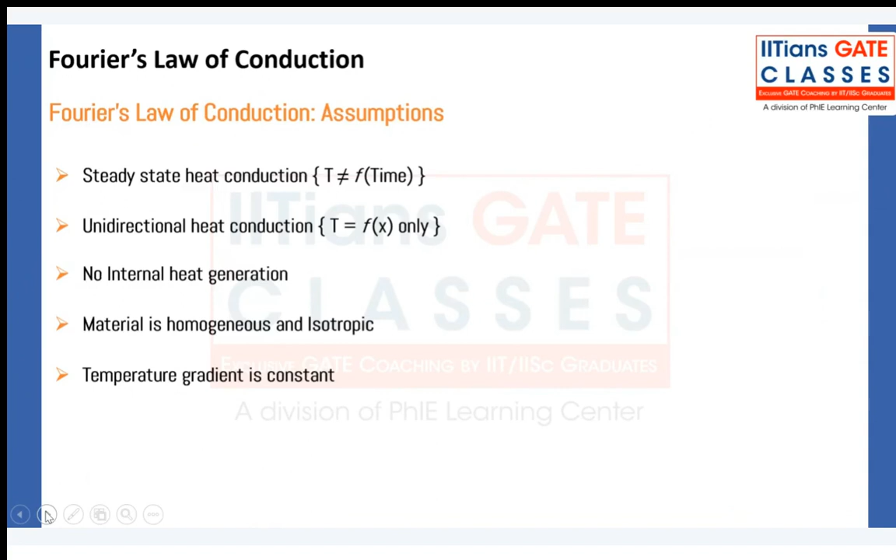Now, first of all, we are going to assume steady state heat conduction. What does steady state mean? The temperature is not a function of time.

But what happens when temperature is a function of time? That means the temperature of the body, inside the body or outside the body at the boundary, is changing with time. Whenever temperature is changing with time, it is called unsteady flow heat transfer. It actually means that rate of energy in is not equal to rate of energy out, so some energy will also be stored in the body. That will change the internal energy of the body, because any mass stores energy in the form of internal energy. So if energy in is not equal to energy out, the internal energy of the body will change. Chalo, theek hai.

Second assumption was unidirectional heat conduction. Why unidirectional? We said that heat transfer is only happening in the x direction. But for example, temperature is also changing in y and z direction, not only x direction. So that is called three-dimensional heat transfer. Now the temperature is not just changing in x direction, it is also changing in y and z direction.

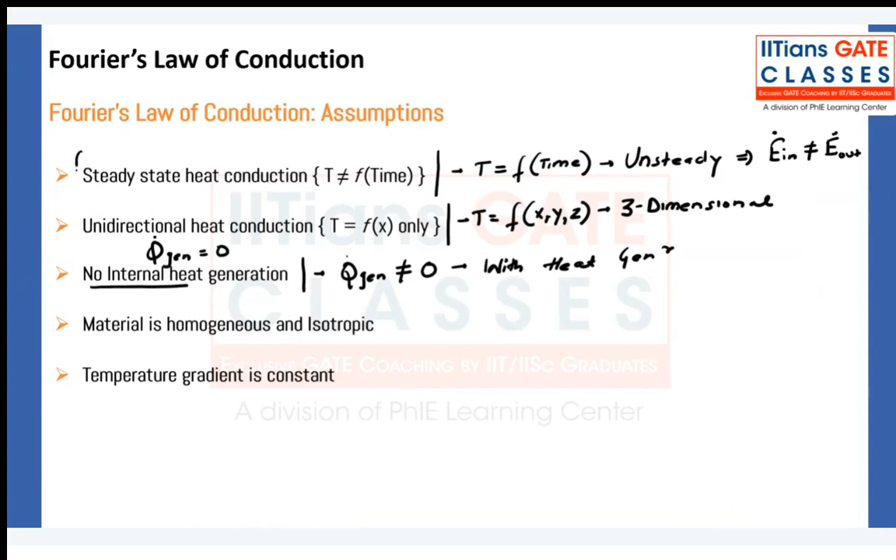Okay, there are other assumptions too, but these are three main ones. If temperature varies with time, that means unsteady state, or temperature varies in the y and z direction as well, or there is heat generation, then you cannot use Fourier's law of conduction. You can only use Fourier's law under these assumptions. If these assumptions are not valid, you cannot use it. That is why we have to come up with a generalized heat conduction equation.

Generalized heat conduction equation: Fourier's law was useful only for unidirectional cases, meaning temperature is a function of only x, y, or z direction. Steady state means temperature is not a function of time, and without internal heat generation. Only under these conditions was Fourier's law valid. But if these conditions change, we have to come up with a generalized heat conduction equation - we cannot use Fourier's law.

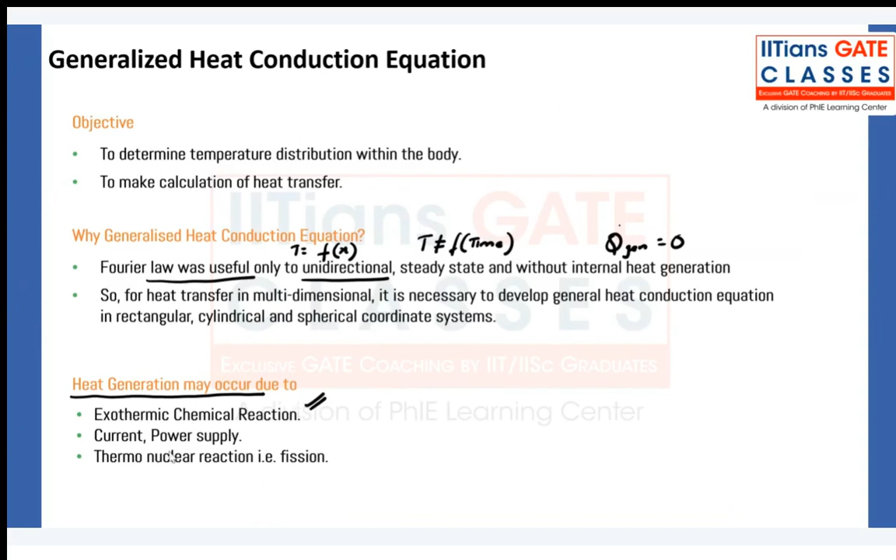So how does heat generation take place? Heat generation can take place inside the body if there is a chemical reaction, or for example if you are supplying current or power. If current is there, because of resistance in a conductor, heat generation can take place. Or nuclear rods, where fission reactions are happening inside the body - that is also an example, but a nuclear reaction happening inside the body in a nuclear rod can cause heat generation.

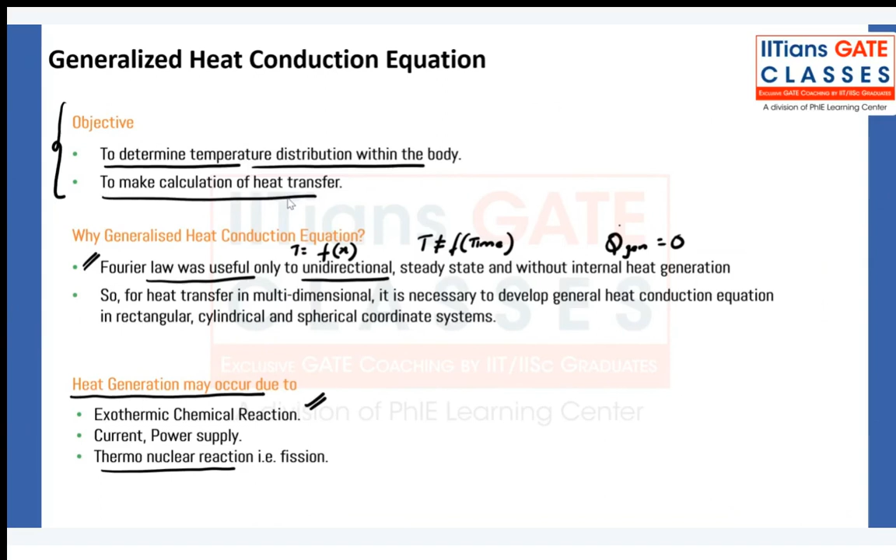So the whole objective of this study is first to define temperature distribution within the body. Earlier we assumed temperature is not changing with time, or it is only a function of x. Now if that is not the case, what is the temperature distribution - how is it changing with x, with y, with z, with time? We also need to make calculations for heat transfer - that is the objective of generalized heat conduction analysis. Okay, let's move on.

Now we will do this for all three cases: Cartesian coordinate, also called rectangular coordinate, then we will move on to cylindrical coordinate, then spherical coordinate. Let us start with Cartesian coordinate - Cartesian is basically in a plane slab.

Let us take a very small element inside the body, of thickness dx, with x increasing in this direction. Now in this small element of thickness dx, some heat is entering, q dot x, and some heat is coming out, and there is some heat generation as well.

All analysis in thermodynamics or heat transfer starts with energy balance, or energy conservation - energy is always conserved, it is a natural law. For the element of thickness dx, we need to do energy balance. What is energy balance? Whatever energy is coming in, plus whatever energy is generated inside this element, will be equal to the energy that is going out, plus the energy that is stored.

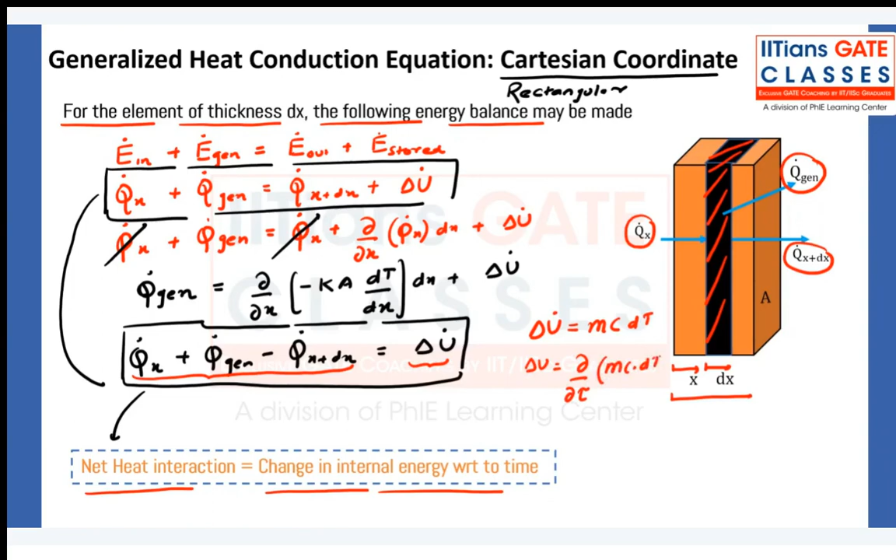Now we all know how do you write delta U. Change in internal energy. Can anyone tell me how do you write delta U? Yes, very nice. MC dt. Okay, now I am not talking about delta U, I am talking about delta U dot. So I can write del by del T of MC dt, or I can also write MC change in temperature with respect to change in time.

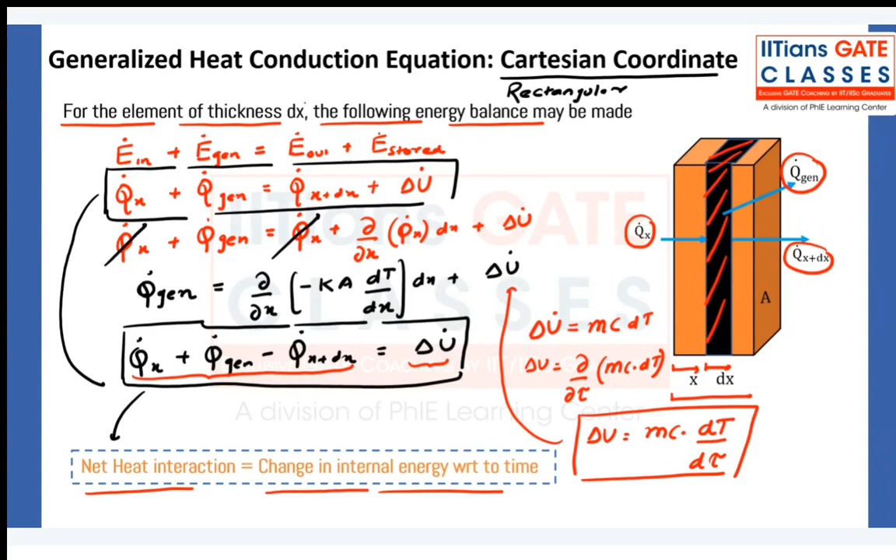So I have to substitute this here. I have to, not here. I mean, I can do it here as well, but our purpose is to put it here. Wait, we are going to consider in the other direction. Just wait, do not worry. We are only talking about x direction as of now. Now let us put it here.

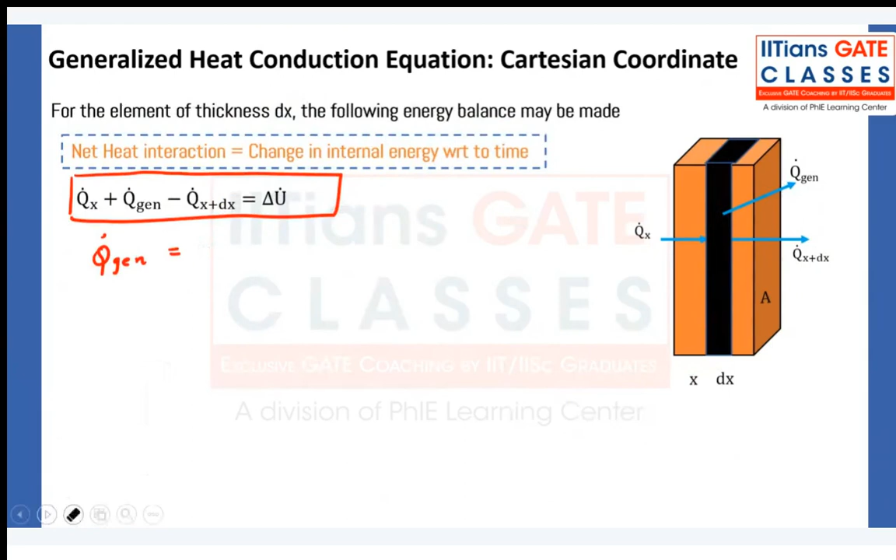So this is the equation, this is the main equation. And from this equation, we have gotten Q dot generation is equal to, minus del upon del x of Q dot x dx plus, what is u? mc dt by d tau. The unit of this is watts.

Let me simplify it further. Q dot generation is equals to, now let me write Q dot generation in terms of per unit volume. So I am writing Q dot generation into volume. The unit of this is watt per meter cube, and this is again meter cube, so you will get watts. And that is del by del x, how can I write this? It is conduction, ka dt by dx.

Now how can I write mass? Mass flow rate, mass is equals to density into volume, and volume is equals to A into dx. What is area? Area is this area, and thickness is this very small thickness. That is the volume, that is the dv. Okay, so let me write rho A dx del t by del tau.

Now this volume is also area into dx. This volume is also area into dx. So let me write the final equation. Area into dx is equals to del upon del x of minus ka dt by dx plus rho a dx dt by d tau. Now what can I do? Area, area, area, dx, dx, dx.

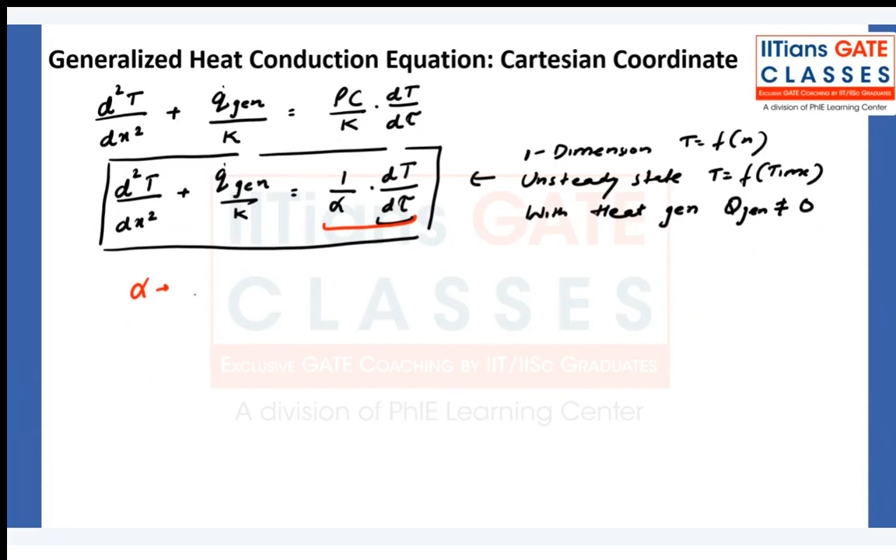Now what is alpha? Can anyone tell me what is alpha? Alpha is thermal diffusivity. K is thermal conductivity. So alpha is equals to K upon rho C.

K is thermal conductivity. Rho is density. C is specific heat. What about units? Watt per meter Kelvin. Density is kg per meter cube. Specific heat is joule per kg Kelvin.

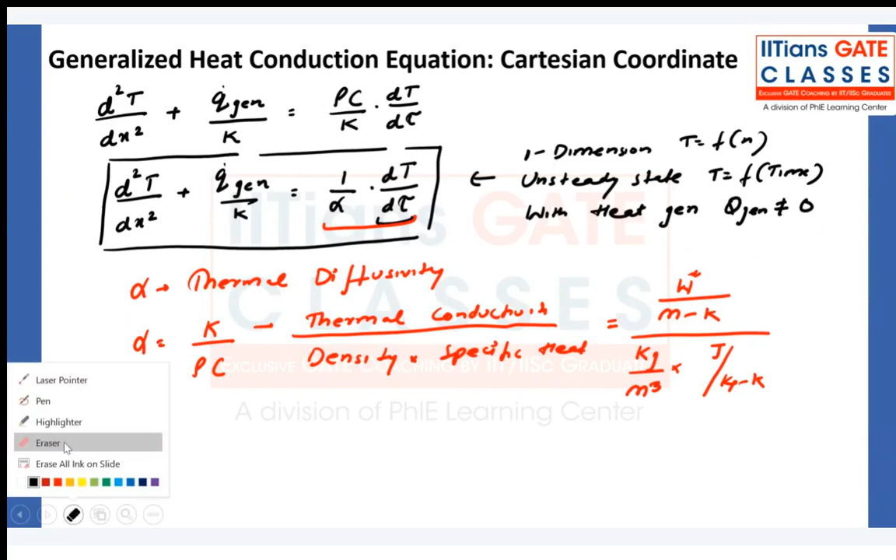Let me write this: watt into joule per second meter Kelvin. So what I have wrote is joule per second, then meter and Kelvin is already there. Kg meter cube into joule per kg Kelvin.

Now let us cancel the units. Joule and joule will get cancelled. Kg and kg will cancel. Kelvin and Kelvin will get cancelled. And this meter cube will cancel this, and you will get meter square per second.

So alpha is, we are going to talk about diffusivity. Do not worry, I am just telling you the mathematics behind it, just the formula right now. We are going to talk about the physical meaning of it later. Now this is only valid under certain conditions.

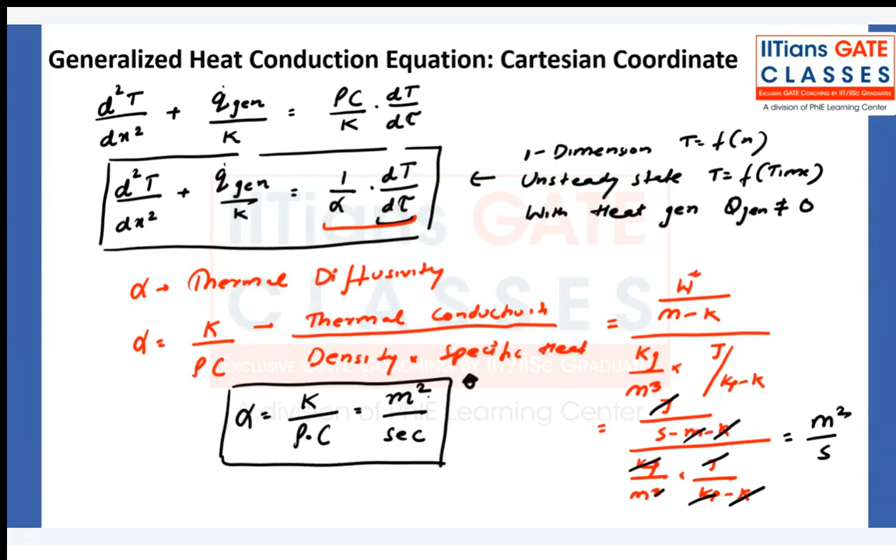But what about if temperature is changing in y and z direction as well? Let us say the generalized heat conduction equation for x direction is: d square T by dx square plus Q dot generation by k is equals to 1 upon alpha dT by d tau.

This is only for x direction, but it is generalized, because it is valid for unsteady state as well as for heat generation. So it is only for x direction. Now, the same thing that we have done, we will do for y and z direction.

Similarly, we will repeat the same process for y and z direction. So we will get this term for x direction, this term for y direction, and this term for z direction. And we will also get this and this term, but it will be common.

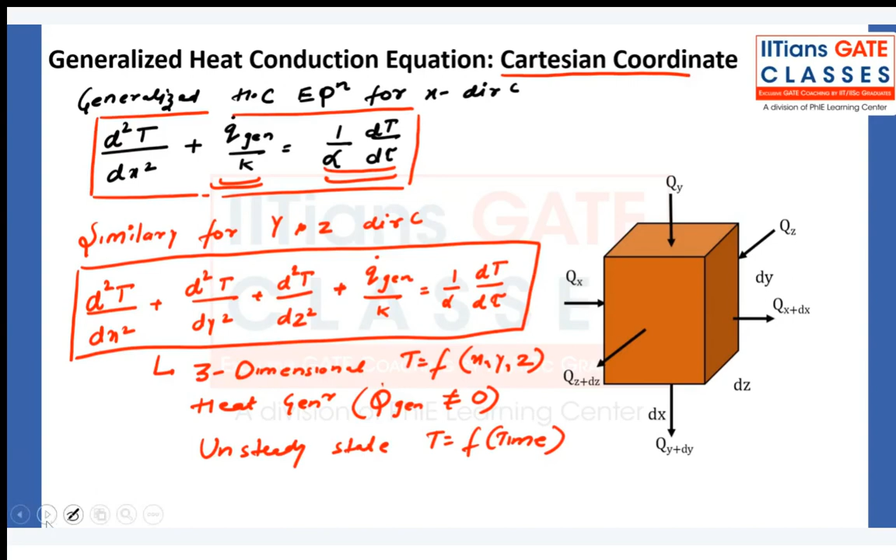Now, concept of thermal diffusivity. As I have said, it is K upon rho Cp, unit is meter square per second. K also tells you how much heat can be conducted from one side to another side. If you have one body here and you maintain a higher temperature T1 here, and here it is T environment.

As heat is transferred from one direction to another, when you start feeling that the surface is getting hotter, this is told by thermal diffusivity. How fast or how slow you will start feeling the temperature on the other end, it will be told by thermal diffusivity. Conductivity will tell you how much heat will be transferred from one side to another. Diffusivity will tell you at what speed the heat will go from one side to another. So it is a thermophysical property of material.

Thermal conductivity tells us how quickly the heat is diffused through the body. Both things are said by this diffusivity. I'll give you an example as well. The value of alpha talks about the ability of the material to allow the rate of heat transfer to get diffused through it. A larger value of alpha means either K is large or the heat capacity is small. Now let us take an example.

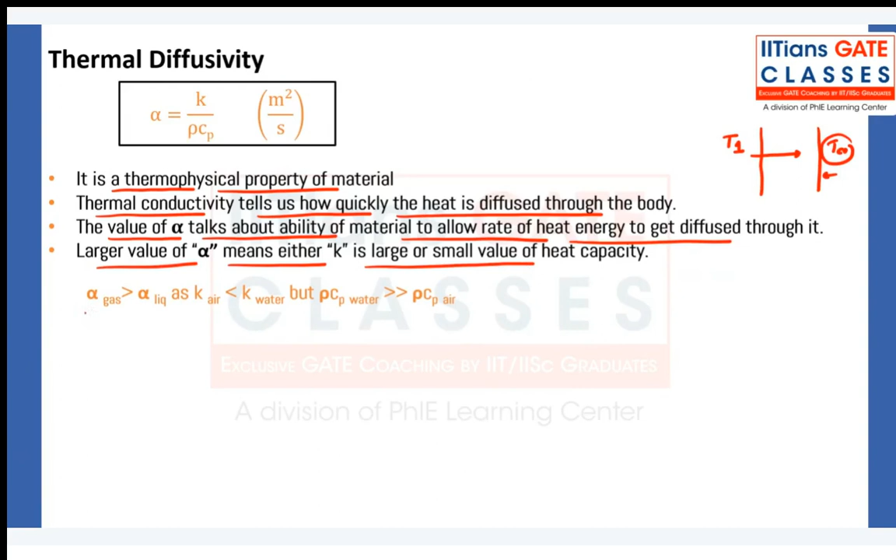You can see alpha of gas is greater than alpha of liquid. This you can read. Anyway, I'll take an example. Let's say you are drinking coffee in a glass cup or in a ceramic cup. Usually we drink in a ceramic cup at home, right?

Now tell me, I am telling you that the thermal conductivity of glass is less than the thermal conductivity of ceramic. Glass already has very low thermal conductivity. So if I am saying thermal conductivity of glass is low, that means what?

So you tell me, when you are holding a glass cup or a ceramic cup, in which cup do you take less time to start feeling hot or heat on the outer side? In which cup do you start feeling heat on the outer side more quickly? Glass or ceramic? Which cup is more comfortable to hold, where you do not feel much heat on the outer side? I want an answer from everyone.

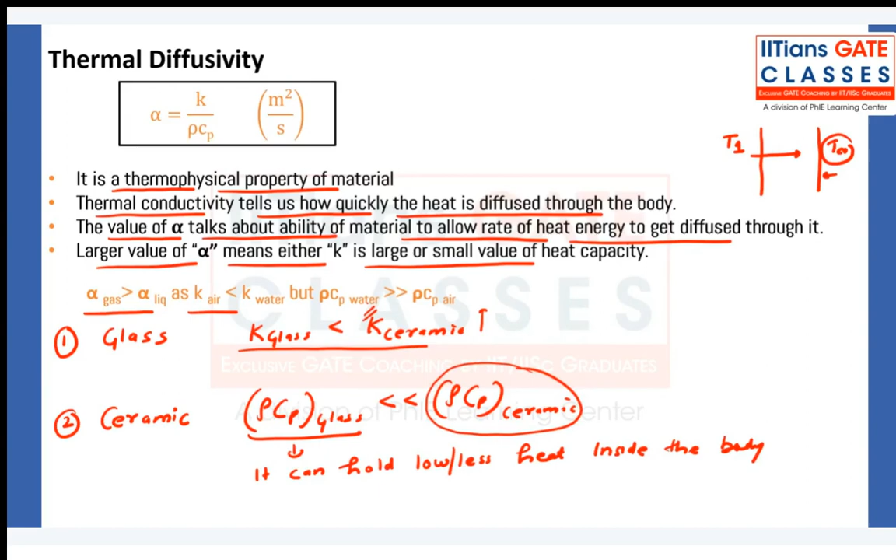It has higher heat capacity, so its conductivity is high. Yes, heat is coming in, but what is ceramic doing? It is absorbing the heat. It is not allowing it to go ahead.

So on the outer side, where you are holding the cup, heat has already diffused from inside. Heat has come inside, but ceramic is storing that heat. It is not allowing it to go to the other side. That is why you will feel the hotness much later in the ceramic cup.

Yes, that is true. The material that ceramic is made of can store more and more heat. Heat is conducted, it has come inside because of conductivity, but it is storing the heat, not allowing it to go to the other side. Because of this heat storage, thermal diffusivity of glass is more - it is diffusing more heat. So even though conductivity is less for glass, you will feel the hotness on the other end much quicker than ceramic.

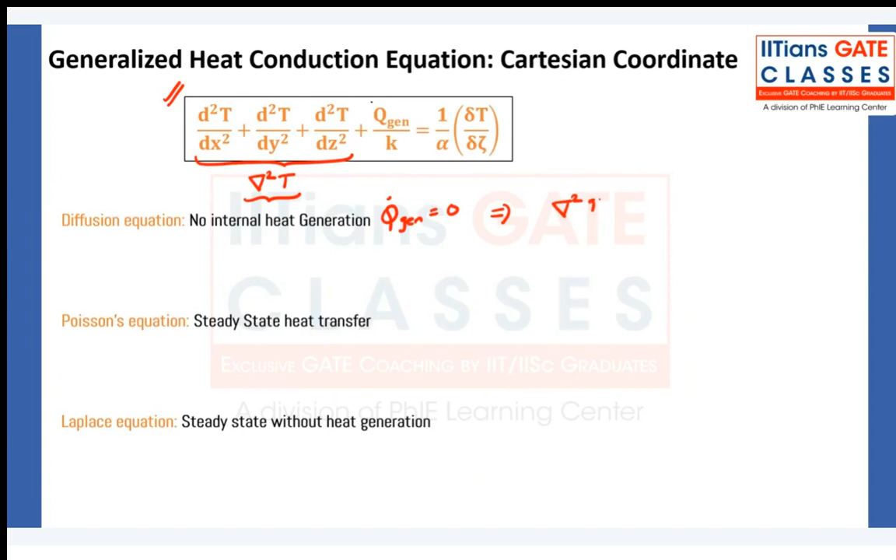So this was our general equation. Now let us make an assumption and go ahead with that. First, let us assume there is no internal heat generation, meaning q dot generation will be equal to 0. So how can I write the above equation? I can write this, I hope you already know this.

This is called the diffusion equation. It is called the diffusion equation.

Then steady state - steady state means what? The temperature is not changing with time, so delta T by delta tau equals 0. So how can I write this now? I can write del square T plus q dot generation by k is equals to 0.

This is called Poisson's equation. And finally, if steady state is also there, meaning del T by del tau equals 0, and without heat generation meaning q dot generation equals 0, then it is called the Laplace equation. Yes, very nice, Sahil.

You will directly get these equations. I'll wait for 1 minute.

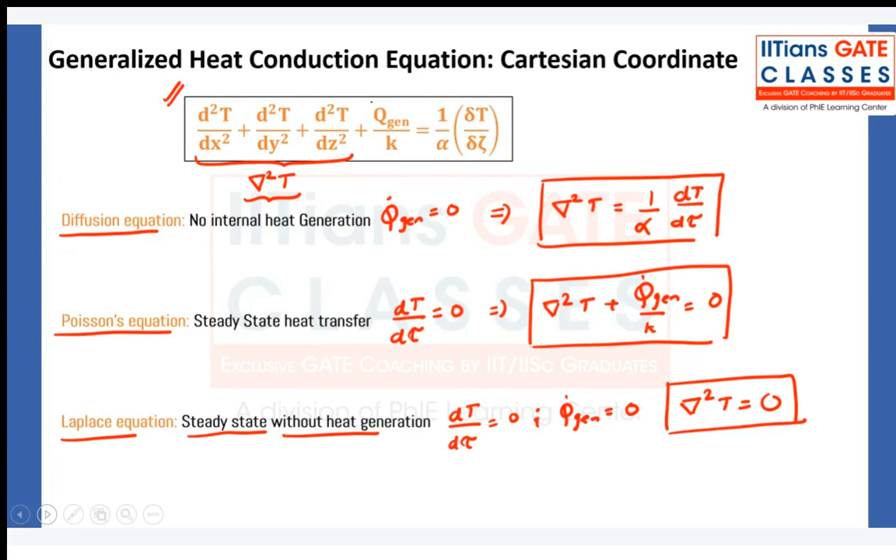So we are talking about steady state, one dimensional heat conduction in Cartesian coordinates without heat generation. It is steady state, one dimensional, and without heat generation. For example, heat transfer through your windows is an example of this type of heat transfer. Inside the window, there is no heat generation, right? And it is happening in only one direction, because this x direction is only significant compared to the thickness of the glass.

The y and z directions are much bigger, so whatever heat transfer is happening there is insignificant. So we assume that heat transfer is only happening in one dimension - whatever you want to call it, x or z, it is a function of only one dimension. And it is steady state because there is no heat generation, and it is not changing with respect to time as well. So this is the case of steady state, one dimensional, in Cartesian coordinates, without heat generation.

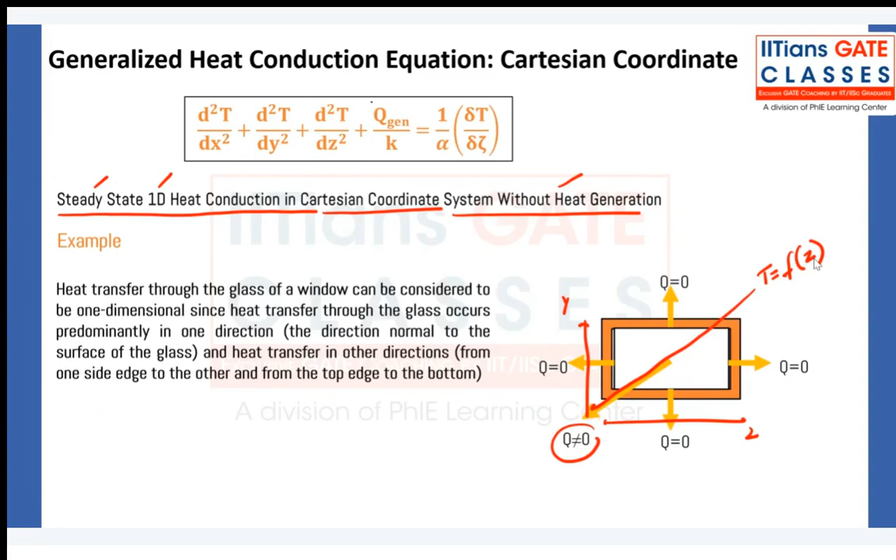So let us take this example, let us take this case, now we will be specific with our case. Okay, steady state - what do I call steady state? First, steady state means the change of temperature with respect to time equals zero. Second, one dimensional means d-square T by dy-square equals d-square T by dz-square equals zero. It is not compulsory that you take d-square T by dy-square - any two would be zero. I am taking that only x is happening.

Any two could be zero, but it is only happening in one direction - it could be x, y, or z. Third, no heat generation, so heat generation is equals to zero. If I apply all these assumptions in the above equation, this is zero, this is zero, this is zero, this is zero. So what do I get? D square t by dx square is equals to zero.

Now this is my equation. It is only valid for what case? Under these assumptions, under these assumptions, under these assumptions. Is it clear?

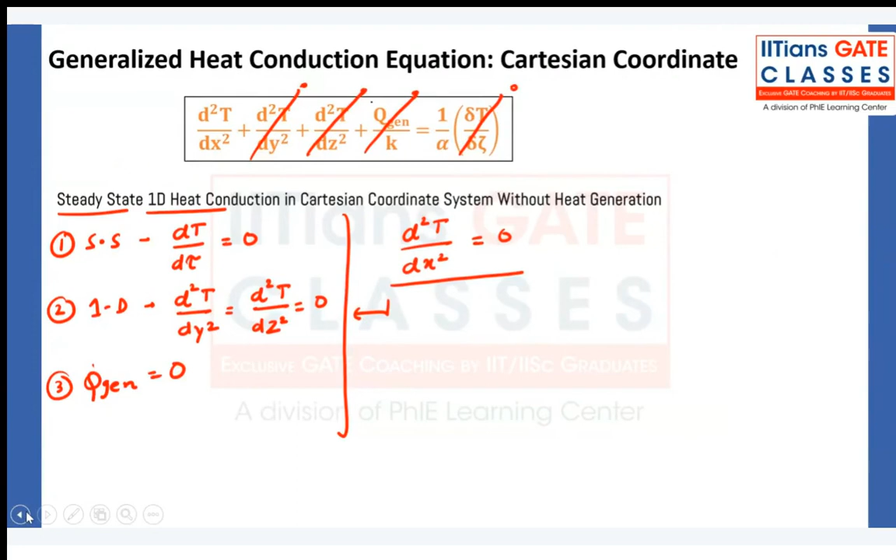So this is my equation, this is my temperature distribution equation. This is my rectangular slab, isn't it? Now what is the boundary condition? X is changing in this direction, and I am assuming at x is equals to 0, t is equals to t1. At x is equals to L, t is equals to t2. And there is no heat generation.

Let me integrate this. If I integrate the first time, I'll get dt by dx is equals to c1. If I integrate this again one more time, I'll get c1 x plus c2. So this is how my temperature is changing with respect to x. I can anyway tell you that this is a linear equation, y is equals to ax plus b. This is a linear equation.

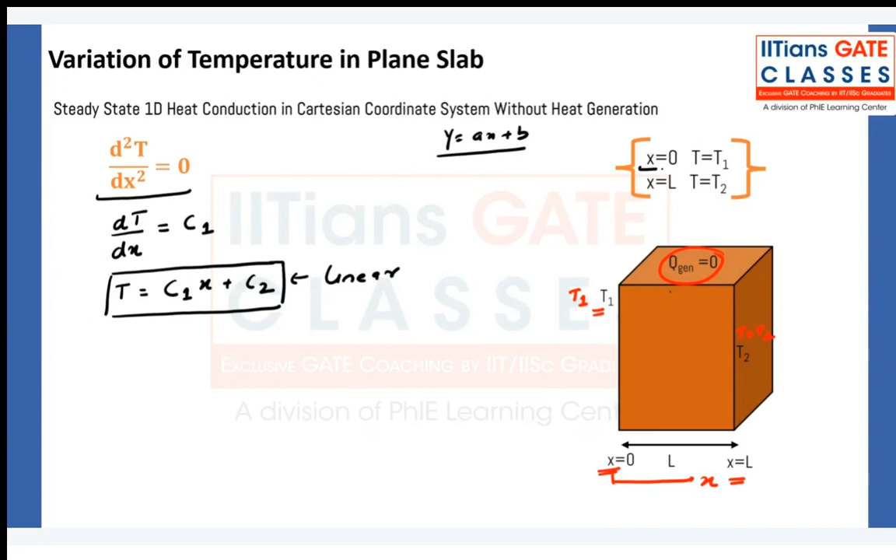But anyway, let us apply the boundary conditions. Let us apply the first boundary condition first: at x is equals to 0, t is equals to t1. So t1 is equals to c1 times 0 plus c2. What do I get from here? c2 is equals to t1.

Let me apply the second boundary condition: when x is equals to L, t is equals to t2. So this will be t2 equals c1 L plus c2, and c2 I already know. Let me write c2 here as t1. So I have replaced c2 by t1. So t2 minus t1 by L is equals to c1. So I got c1, I got c2.

Let me put this here. So what do I get? T is equals to c1, which is t2 minus t1 by L, times x plus t1. Now this equation is also telling me that it is a linear equation.

So in a rectangular slab, in a plane slab, temperature variation is linear, when all these conditions are satisfied: steady state, one dimensional, without heat generation. In this case, temperature variation is linear with respect to x in plane slab.

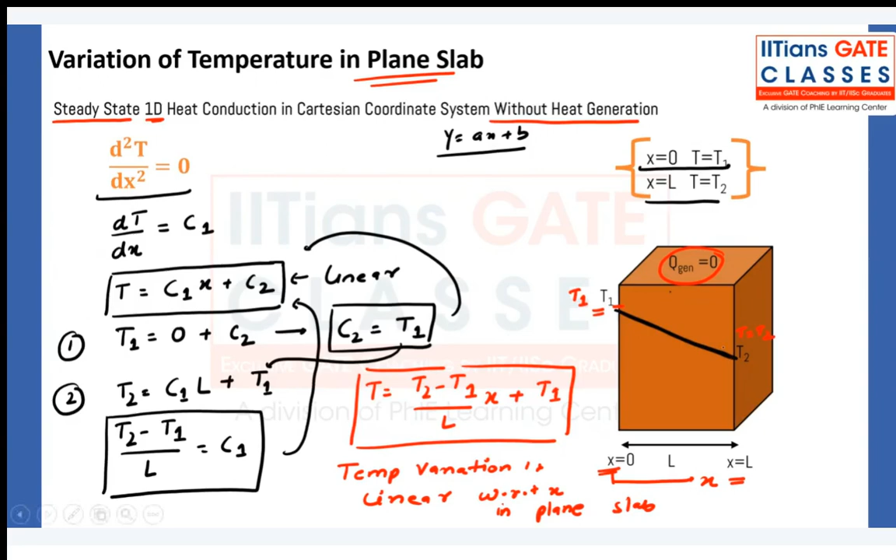So how do I draw this? Anyway we were drawing it like this, but now I know that it is varying linearly, like this only. So this is my temperature variation in this case, linear for plane slab when steady, one dimensional, and no heat generation - only then it is valid for plane slab. So it is linear.

The temperature distribution is not a function of k, so it is independent of material because k is a material property. So whatever the material is, temperature is going to linearly vary with x.

Now we have come to steady state, one dimensional in Cartesian coordinate, but with heat generation. There is a heat generation. Heat generation is not zero, heat generation is not equal to zero. Let us write this.

So when I say steady state, that means dt by d tau is equals to zero. One dimensional, when I am saying it is d square t upon dy square is equals to d square t by dz square is equals to zero. So what am I left with? These two are zero, so I am left with d square t by dx square plus q dot generation by k is equals to zero. I am going a little faster because these are derivations only, it is simple mathematics.

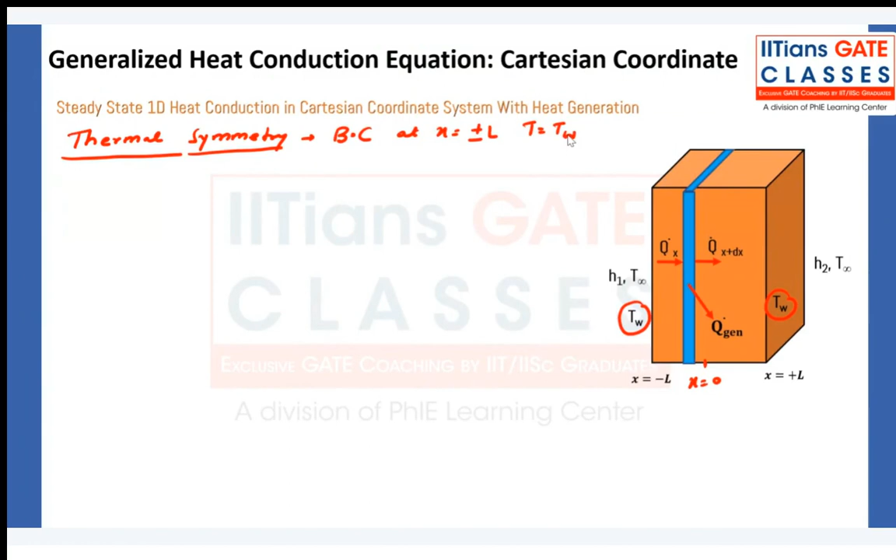Now do not assume that this is the only case. There is a case of thermal unsymmetry as well, where the temperature could be different. Then you need to derive it again, but we are deriving for thermal symmetry. You need to know the steps. But if another case comes, then you need to derive it yourself. But for GATE exam, it will be a very small derivation.

Now temperature, I defined the temperature distribution equation. This equation is: minus q dot generation by 2k x square plus c1x plus c2. Now let me apply the first boundary condition. What is the first boundary condition? X is equals to minus L, T is equals to TW.

So what will I get? I will get TW is equals to minus q dot generation by 2k times minus L square plus C1 times minus L plus C2. So can I write it as minus q dot generation by 2k L square, because it is minus L square, so minus square means plus, minus C1L plus C2.

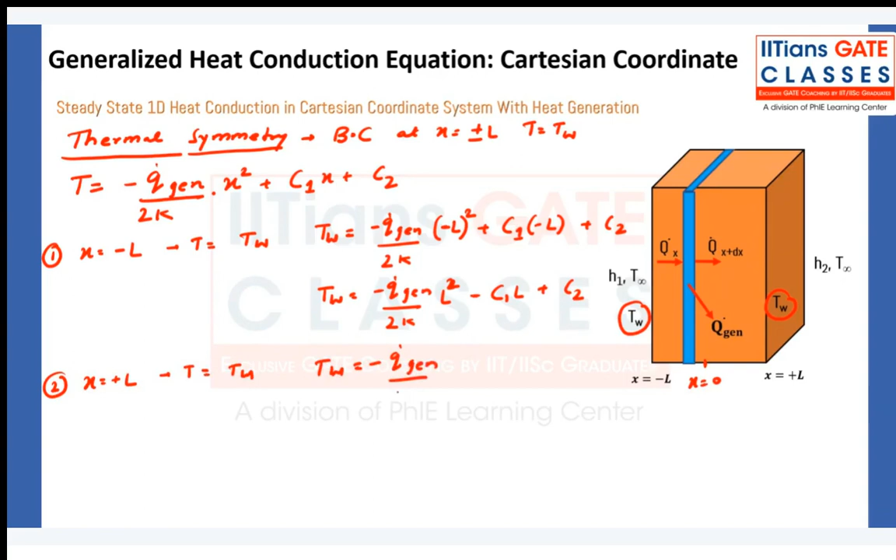Second boundary condition. What is the second boundary condition? X is equals to plus L, T is equals to TW. Let me apply this. TW is equals to minus Q dot generation by 2K L square plus C1L plus C2. Okay, what can I do now? Let me add them. So 2TW is equals to 2 minus... one second.

2TW minus 2Q dot generation upon 2KL square. This will get cancelled. It is minus C1L plus C1L to, and this is 2C2. So from here I can get C2 equals TW, because this 2 will also get cancelled. TW plus Q dot generation by 2KL square. This is my C2.

Now let me put C2 here. So when I put C2 here, what will I get? Let me write this on the next page, I can't write it here.

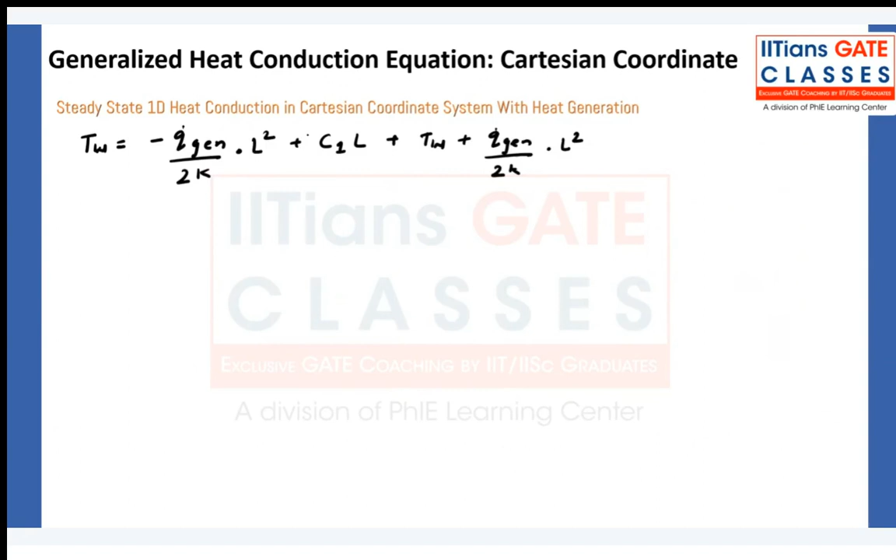TW is equals to minus Q dot generation by 2KL square plus C1L plus TW plus Q dot generation by 2KL square. Yes, very nice. So TW and TW get cancelled, same sign. This is opposite sign, this will get cancelled, and you will get C1L equals 0.

That means C1 is equals to 0. Now I got the value of C2, that is this. C1 is 0, that is what I wanted. Now I can substitute in this equation.

What will I get? This is the general equation now. T is equals to minus Q dot generation 2KX square plus TW plus Q dot generation. You know C1 is 0, so C1 I can remove. Generation by KL square by 2. This is my general equation, this is my temperature general equation.

Okay, now I need to find out. You see, this is by 1 second, this is my body. Now what I am saying here, it is TW, here also it is TW, and there is heat generation inside the body. Now that means there is a location, there could be an X. If T is decreasing in this direction, increasing in this direction, so there will be a location at which T will be maximum. I need to find out that location. How will I find out that?

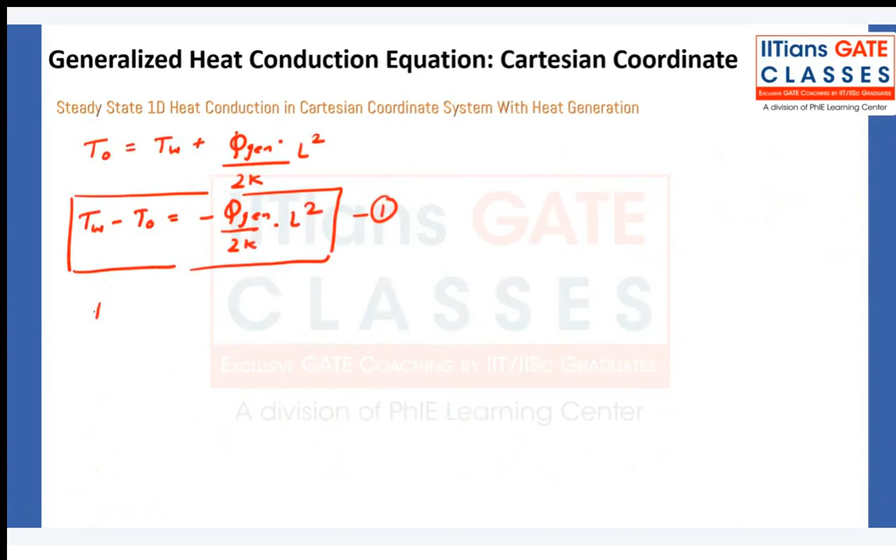This equation, okay, I can take, let me rewrite this equation. There's so many equations. T is equals to minus Q dot generation by 2KL, what is this? X square plus TW and plus Q dot generation 2K upon 2K into L square.

Okay, so can I write T minus TW is equals to Q dot generation by 2K, L square minus X square. Is it clear? Is it clear till now?

Okay chalo, so now what is TW? TW is, you can take it out, TW from here. Okay, so let me write it. TW is equals to T naught plus, it is minus T naught plus Q dot generation by 2KL square. Okay, from here I have taken out TW and this is already there. Just 1 second.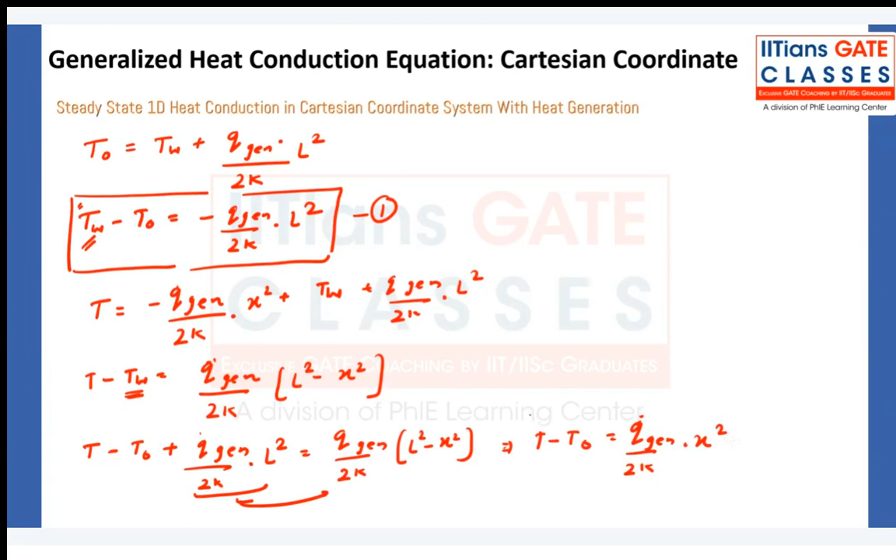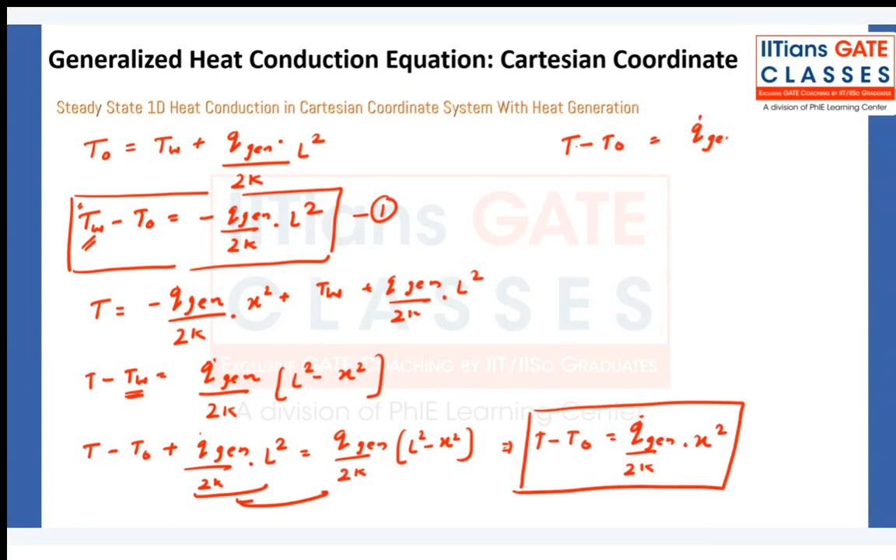So it is T minus T naught equals Q dot generation by 2K X square, upon TW minus T naught equals Q dot generation by 2K L square. So this and this will get cancelled. You will get X by L, the whole square.

Now this is your temperature distribution in the case of heat generation. In the case of heat, which negative sign? Which negative sign?

This will come on the other side. No, TW, here we have minus. So it will become positive, right? Are you telling about this sign?

No sir, like we are taking Q generation to the other side, right? So when we minus the x... Okay wait, tell me. Hello? Hello sir, hello, tell me. Like when we take Q gen L square by 2k to the other side, there we will cancel out the L square and minus x square will be left out, right? Yes.

So okay, there is a minus Q sign here. Yes. Okay, so here we already have some minus and it will get cancelled. Is it okay?

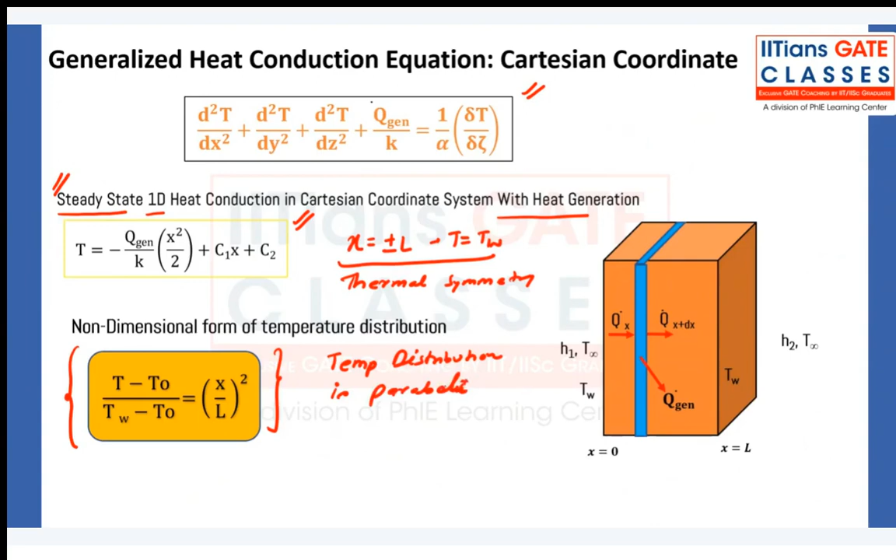Now, so what happens if there is not thermal symmetry? Okay, this is non-symmetry. On this side we have T1, on this side we have T2. What will you do? Look, your temperature distribution equation will remain the same.

Now you will put these boundary conditions in this and find out C1 and C2. Once you have found out C1 and C2, you can put that back here, and then you will get a temperature distribution equation as a function of x. That way you will know how the temperature is varying in this particular case.

And then what you can do? You can do dT by dx, and put that equal to 0 to find out x max, at what location you are getting the maximum temperature. So these T1 and T2 will be given to you in the question, and you can put this and solve. Okay, is it clear?

Is it clear to everyone? Shruti, any doubt?

Okay, I am very happy to skip derivations, I have no problem. If I just give you the results directly for spherical, I can do that. But at the initial level, it's a good idea to know how we are proceeding, because if in the exam they slightly move out of the conditions, since everything we are doing involves applying boundary conditions and assumptions, if you know the process, you can apply them. Chalo, let us move on.

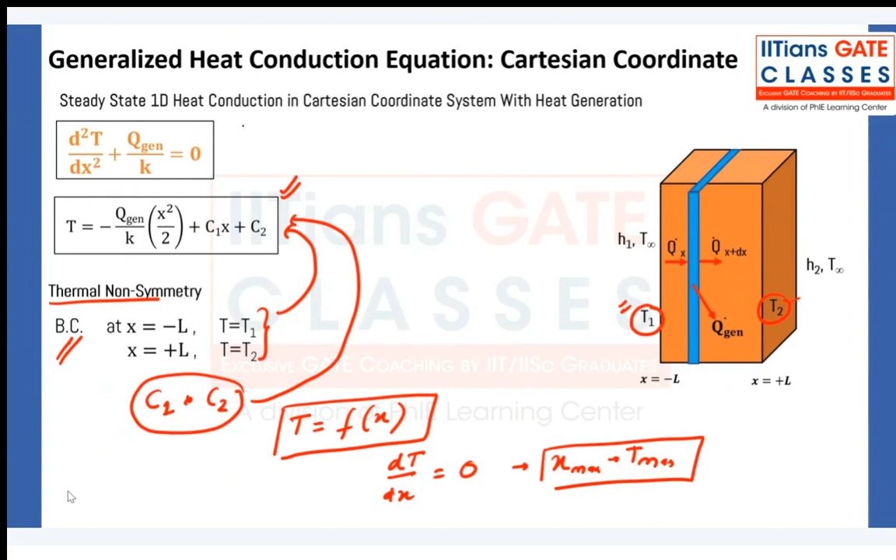Now we have come to cylindrical coordinates. What we are going to do is apply the same energy conservation we have applied before. First we are only talking about thickness dr, then we are going to extend this later on.

This is the same equation which we have taken for energy balance. Now if I extend this: q dot x plus q dot generation minus q dot x minus del upon del x of q dot x dx is equals to mc dt by d tau.

Now this I can conveniently cancel. How can I write this in the form of watt per meter cube instead of watts? I'll have to multiply it by volume. Volume is area into dr, small dr.

Just a second, I've made a slight mistake here because I took the general equation of Cartesian coordinate. It's my mistake, chalo.

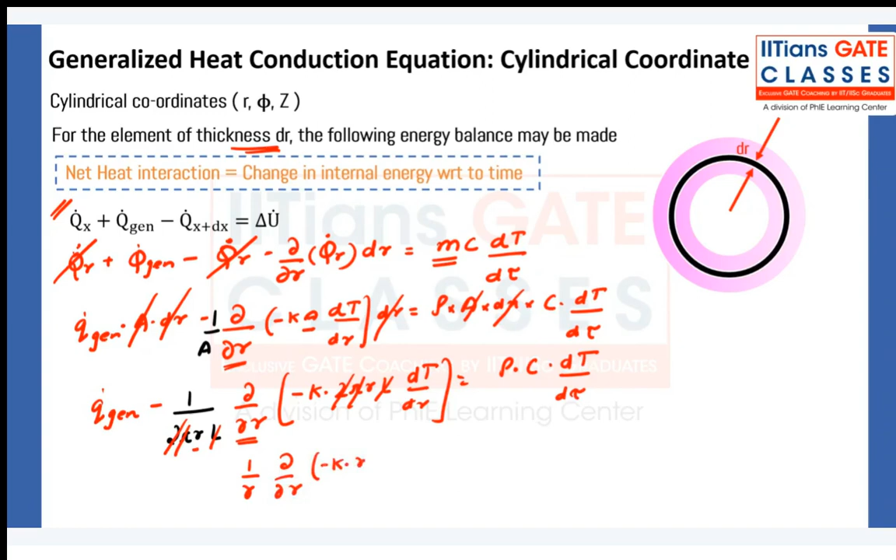So what we get here: I can write 1 by r, del upon del r, minus minus becomes plus, so this: 1 by r del upon del r of minus k dt by dr plus q generation is equals to rho c dt by d tau.

Clear? Is it clear till now?

Now what can I do? Let me divide everything by k. If I divide everything by k, conductivity being constant goes out, and this term also gets divided by k. So eventually we get: 1 by r del upon del r of minus r dt by dr plus q dot generation by k is equals to 1 upon alpha dt by dt. I don't think I need to tell you about alpha, it's k upon cp, rho c, that is k upon rho c.

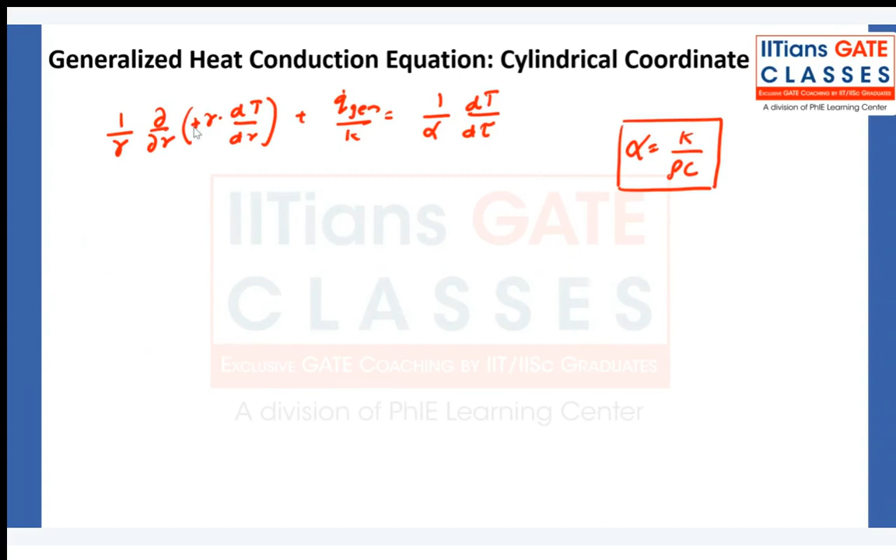Yes, very nice, sorry my mistake, okay so this is done. Now this is my generalized equation for cylindrical coordinate, which means it is one dimensional: temperature is a function of r, it's unsteady state meaning temperature is a function of time, and heat generation is happening, meaning q dot generation is not equal to zero. Then only, and it is for cylindrical coordinate, you can use this equation. This is the general equation, chalo.

Now what will happen if I am not talking about just the r direction? So I am going to consider r, theta and z. There is a whole derivation for it which is really of no use for us, seriously. So for the r direction, what we have defined is 1 upon r del upon del r of dt by dr.

You have to write this equation so many times that you yourself remember it. You don't have to see it again and again, although I sometimes need to see it again, but because I am not preparing for it, you are. So I can have the leverage of going back and seeing it, but you don't have that freedom. Okay, I have done my part. Chalo, theek hai, this is for the r direction.

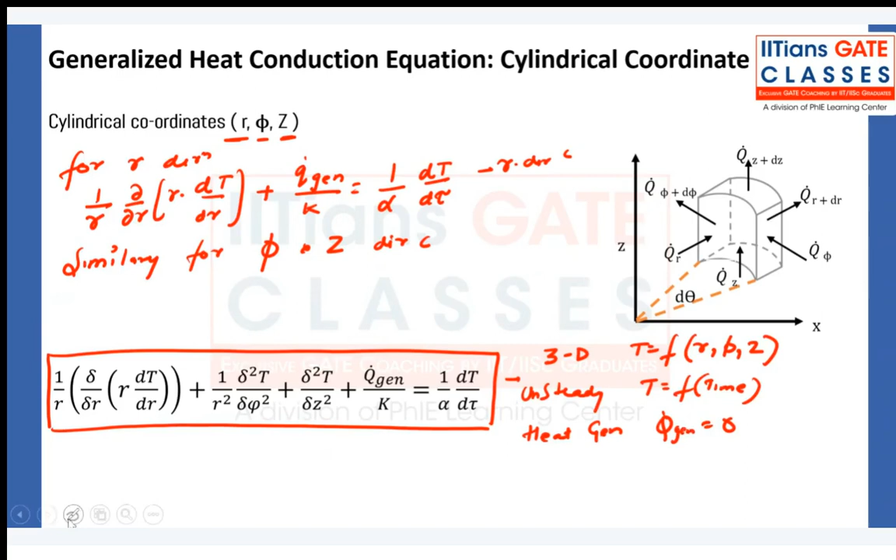Chalo, now we need to do the same thing, we can't do anything else. So this is my general equation. Now I'll take the most simplest case: steady state, one dimensional, and without heat generation.

Without heat generation means this term is 0. Steady state means this term is 0. And one dimensional means these two terms are also 0. So I can write: 1 upon r, del upon del r, of r dt by dr, is equals to 0. This is my equation under these conditions: steady state, one dimensional, and without heat generation. So I can write it as del upon del r of r dt by dr is equals to 0, because r moves to that side and the equation equals 0.

Now let me integrate it. Integrating the first time, what will you get? r dt by dr is equals to C1. Very simple. Integrate it one more time. We will integrate again, but let me simplify it first: dt by dr is equals to C1 by R. Now if I integrate it, I get T is equals to C1 ln R plus C2.

So what do I know? In the plane slab, under these conditions, the temperature distribution was linear. But under these conditions, for a cylindrical coordinate, the temperature distribution is logarithmic. Okay, chalo, but I can't leave it here, I need to simplify it a little further. I have already derived that the temperature distribution is C1 ln R plus C2.

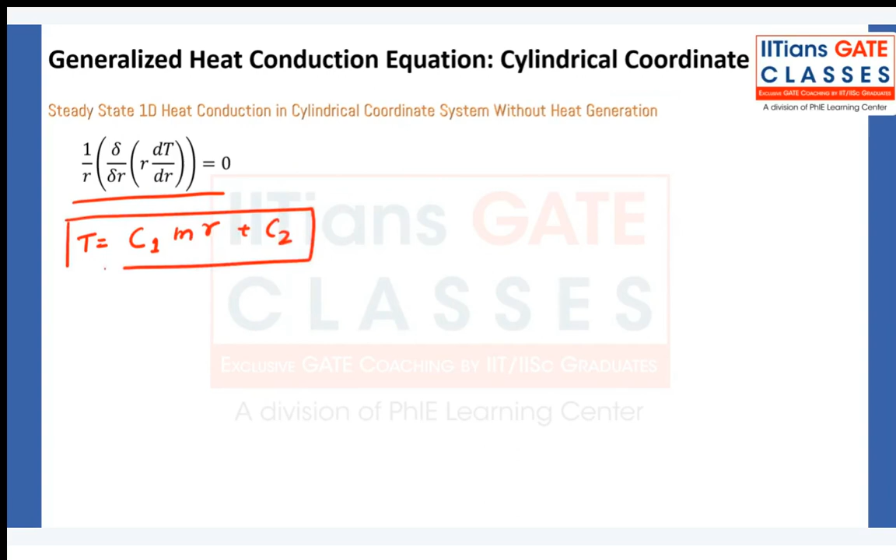Now I have to apply the boundary conditions. What are the boundary conditions? If this is the cylinder, at the inner surface, temperature is T1. At the outer surface, where R is equals to R2, temperature is T2. So it looks like this: at R is equals to R1, temperature is T1; at R is equals to R2, temperature is equals to T2. So these are my boundary conditions.

It's very simple, you can do it yourself as well, because I am not doing it right now. I don't know if I left the space for it, but it's very simple, it's not a very big issue. For GATE also it is not required, but it is a simple step. What is the simple step? Look, you apply these boundary conditions and calculate.

Apply boundary conditions and calculate C1 and C2. Okay, C1 and C2 we have calculated.

Then substitute C1 and C2 in the temperature distribution equation. Which equation? Again, this is the temperature distribution equation. Okay, so once you do that, you simplify that and you will find out this equation.

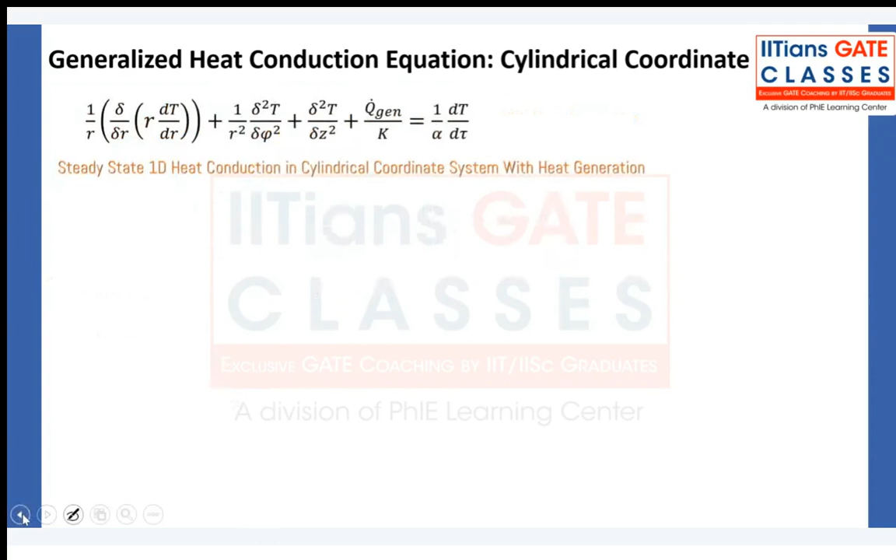Now, in order to maintain steady state, whatever heat is generated inside the body, you have to convect it outside. If this is your cylinder, whatever is generated here at the center, it needs to be convected out by using some fluid.

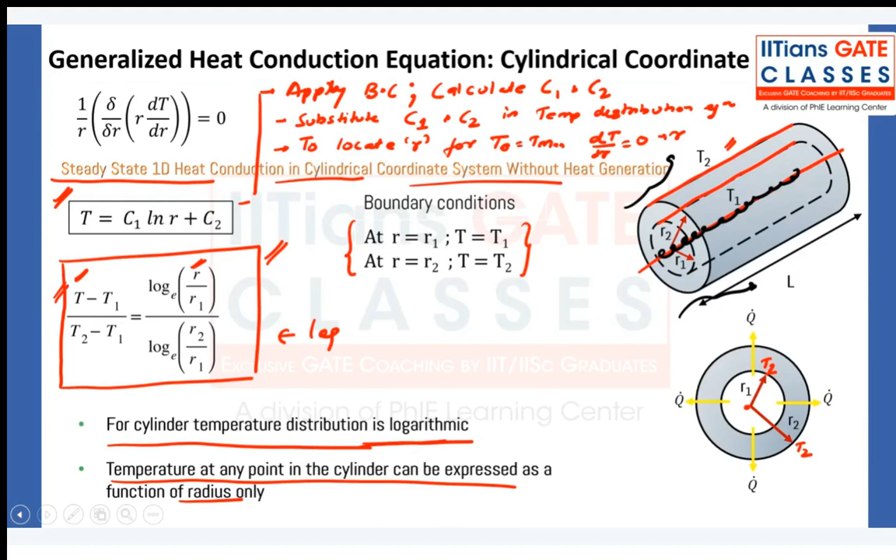Only then you will be able to maintain constant temperature on the boundaries. That is the main criteria for nuclear rods. You have to maintain whatever chemical reactions are happening inside, whatever heat is getting generated, but you need to maintain a constant temperature outside the nuclear rods, because you cannot let the temperature of nuclear reaction and nuclear rod increase. Otherwise, there will be uncontrolled reaction. So you cannot allow that.

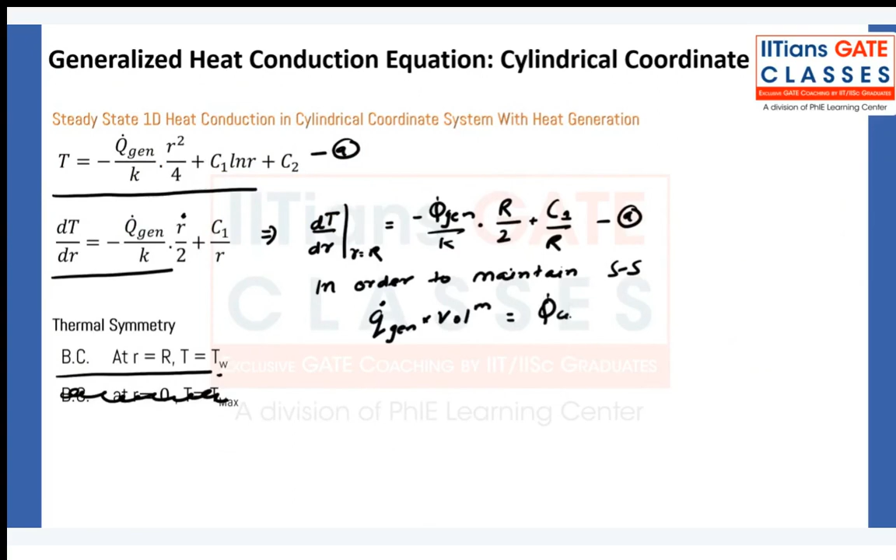So in order to maintain a steady state, whatever heat is generated, Q dot generated into volume is equals to Q convected. Whatever heat is generated, you need to take it away by using convection. So what can I write? Q dot generated into volume, pi r square L, is equals to, first of all it is conducted. So it is conducted out of the nuclear rod. You see here, first of all it will be conducted out and then it will be convected out.

So it is also equal to conduction, and then it will be equal to convection. Okay, now it is minus Ka dt by dr at R is equals to capital R. Only here it will be equal to Q convected. Where is Q convective happening? At the surface, at R is equals to capital R, here.

Is it clear till now or not? Any confusion here? Convection is happening at outer radius, at R is equals to capital R. Is it clear? Any doubt till now? Then we'll move ahead.

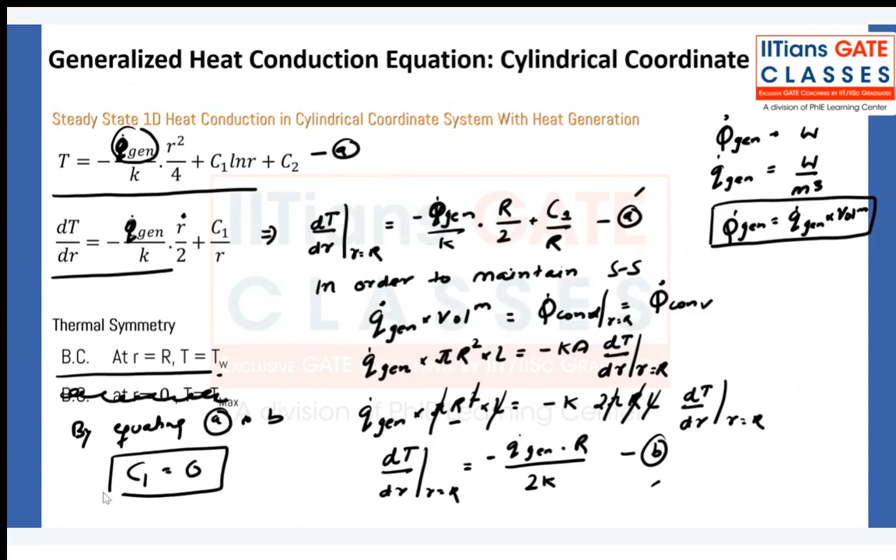Okay, now what can I do? I need to find out the location of maximum temperature.

So I need to find R that will give me maximum temperature. How do I find out? I have this equation, dt by dr. So dt by dr is equal to minus q dot generation by 2k r, plus c1 by r.

And I know that c1, I have just now found out, is 0. So we need to put it equal to 0. What does that give me? What is the location of maximum temperature? So minus q dot generation into r by 2k is equal to 0. That means r is equal to 0. It is the location of

T max or T naught. So now what do I do? Let me put this here. So this is my equation. T is equal to minus q dot generation by 4k r square, plus c1 ln r, plus c2.

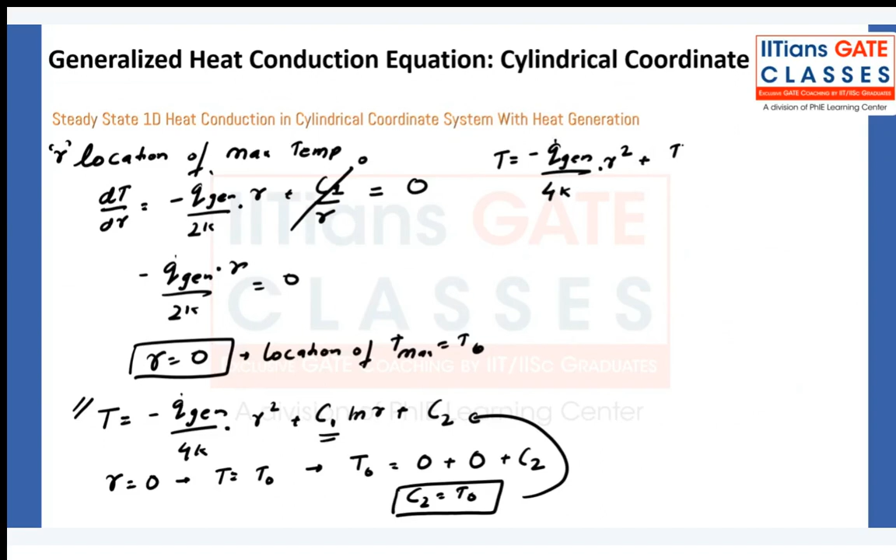So what is the main equation now? T is equal to minus q dot generation by 4k r square. Now c1 is 0, so I will not write c1, plus T naught. So can I write T minus T naught is equal to minus q dot generation by 4k r square? Yes, I can write this.

And I also know that at r is equal to capital R, T is equal to Tw. I can also put that in the same equation. So I get Tw minus T naught is equal to minus q dot generation by 4k, into capital R square. So this gives two equations.

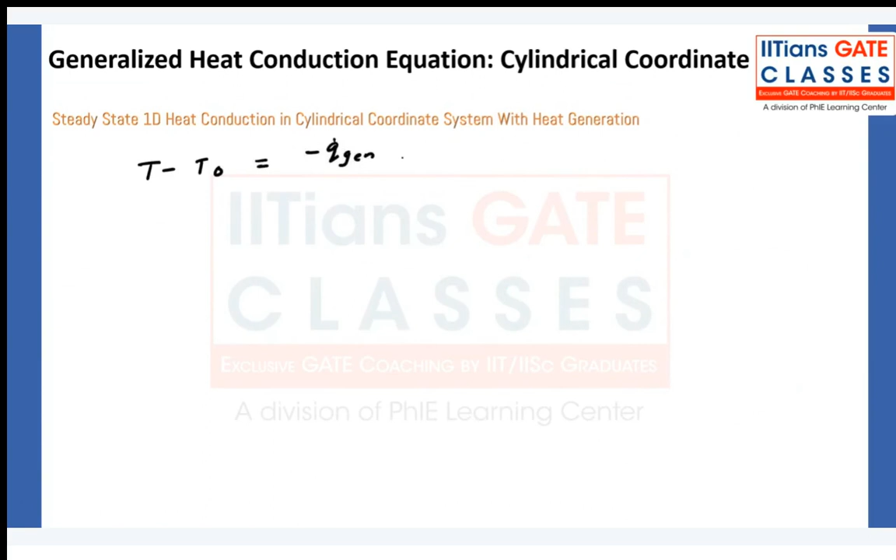Now I can just compare these two equations. T minus T naught is equal to minus q dot generation by 4k r square, upon Tw minus T naught is equal to minus q dot generation by 4k capital R square. So this and this will get cancelled. T minus T naught upon Tw minus T naught is equal to r square by R square. So what is this equation?

Again parabolic. Do you remember the last equation in Cartesian coordinates? T minus T naught upon Tw minus T naught is equal to x by L whole square. This was for rectangular or Cartesian coordinate, when steady state is there, one dimensional, but with heat generation. And this one is for cylindrical coordinate. This is also parabolic. Clear?

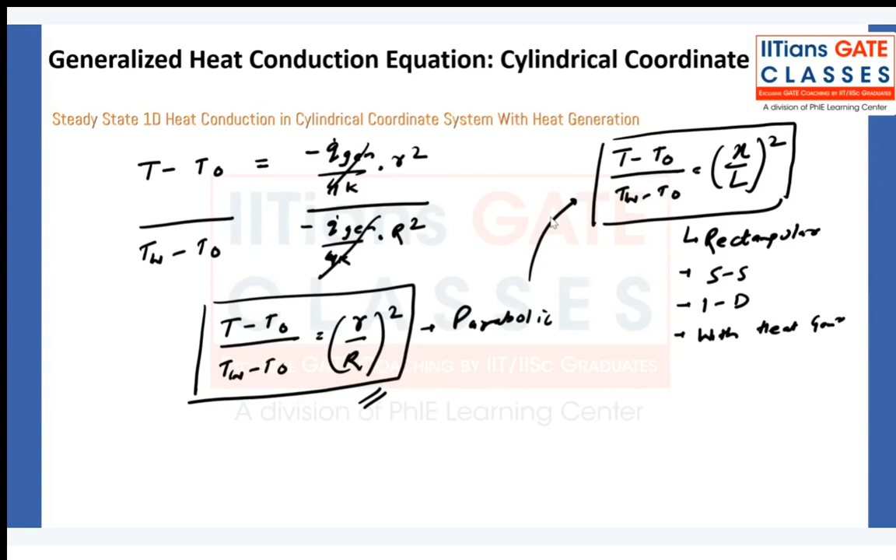Now finally, this is what we have done with heat generation. This is my temperature distribution equation. I have applied the boundary condition at r is equal to capital R, T is equal to Tw, and found out c1 and c2, and this is my parabolic temperature distribution.

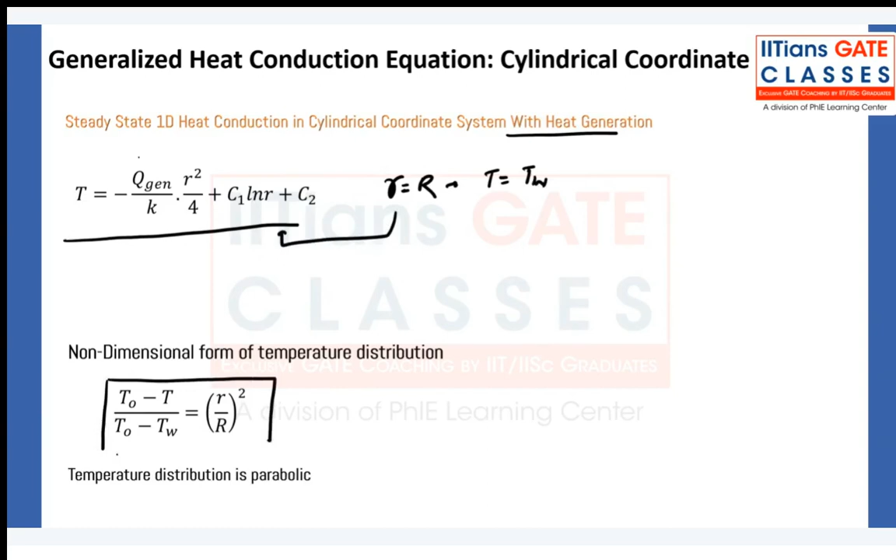Chalo, finally let us come to spherical coordinate. No, I don't remember any time this question came. Look, in the last 6-7 years, I don't remember any question from this. And anyway, spherical coordinates are very rare.

On critical thickness everything will come, but not on the generalized heat conduction equation, so it is not very important. Still, let us try to take a brief idea of this.

So again, spherical coordinates are r, phi, and theta. We will start from this equation, and this is my generalized equation. It is in R, three-dimensional, unsteady state,

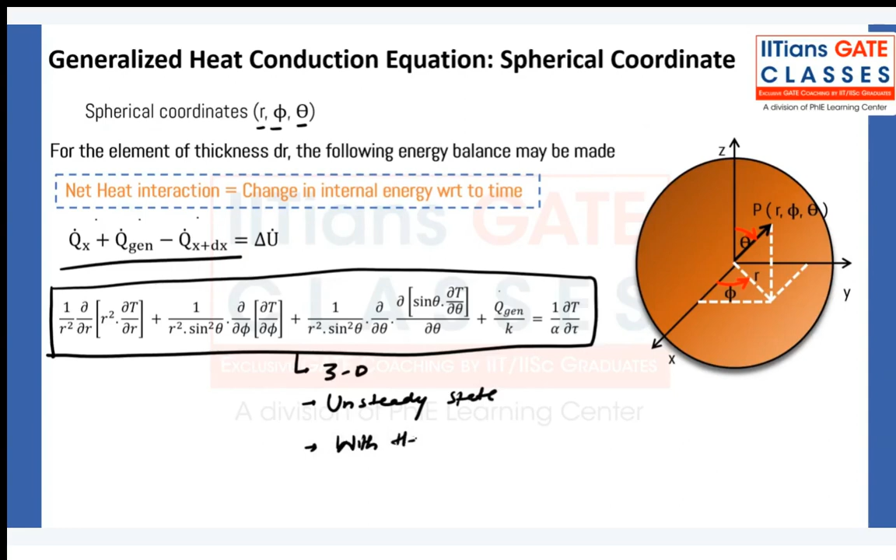and finally with heat generation. Now, if I consider the same case, steady state, one dimensional, without heat generation, what will I get? 1 upon r square, del upon del r square, del T by del r, is equals to 0.

So if I simplify it, what will I get? Del by del r of r square into dt by dr is equals to 0.

Now let us integrate. You will get r square dot, dt by dr is equals to c1. Now can I write dt by dr is equals to c1 by r square? So let us integrate one more time, because we need the temperature distribution equation, right?

If you integrate this, you will get T is equals to C1 times the integration of 1 upon x square. 1 upon x square, it is minus 1 upon x. Integration of x to the power minus 2 -- I hope you all know this, right? x to the power minus 2 plus 1, minus 2 plus 1, and it is minus 1 by x.

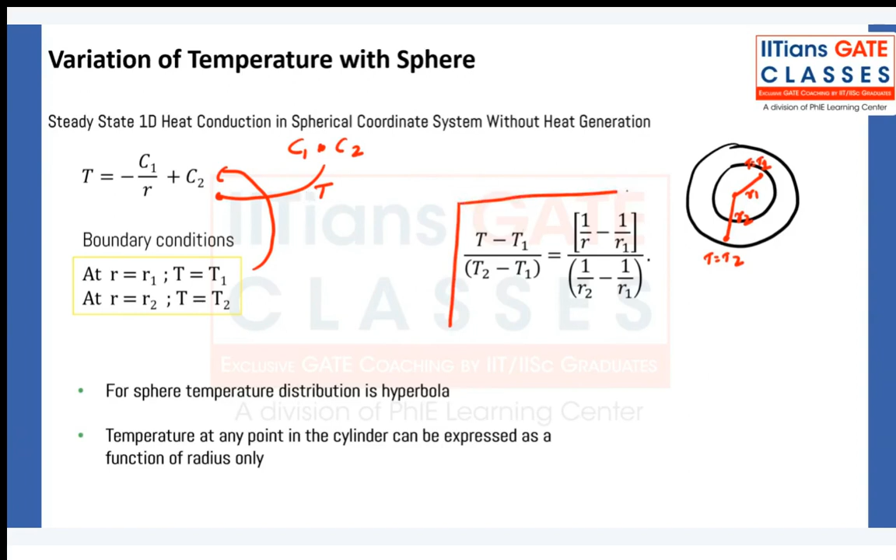put C1 and C2 here again, and you will get a generalized temperature distribution equation. The steps will be followed, and you will get this temperature distribution equation. What is this equation? It is a hyperbola.

So temperature at any point in the cylinder can be expressed as a function of radius only. Similarly, for the cylinder, it can be expressed as a function of radius only. And the final case now, with heat generation for spherical coordinate.

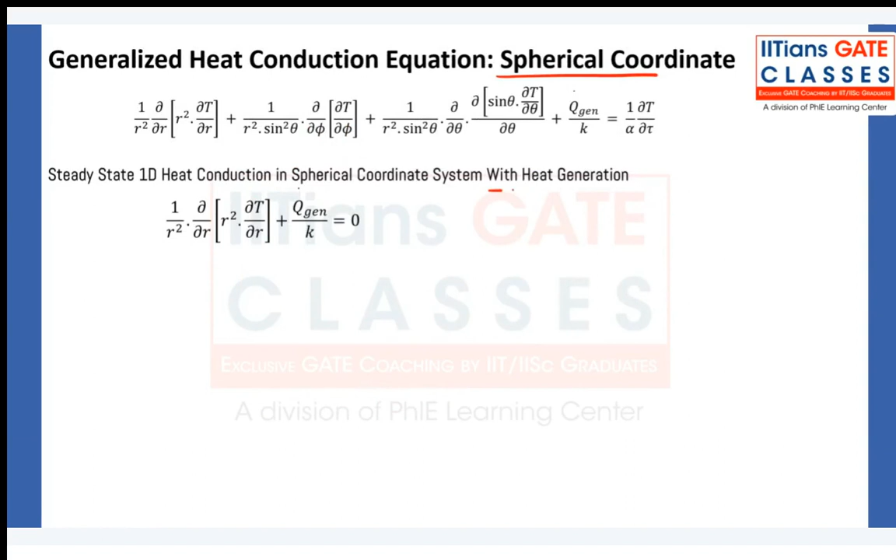So steady state means this is 0. One dimensional means this, and this is 0. So this is your equation. Again, what can you do? You can simplify it as del by del r square, dt by dr, is equals to minus q dot generation by k into r square into r square.

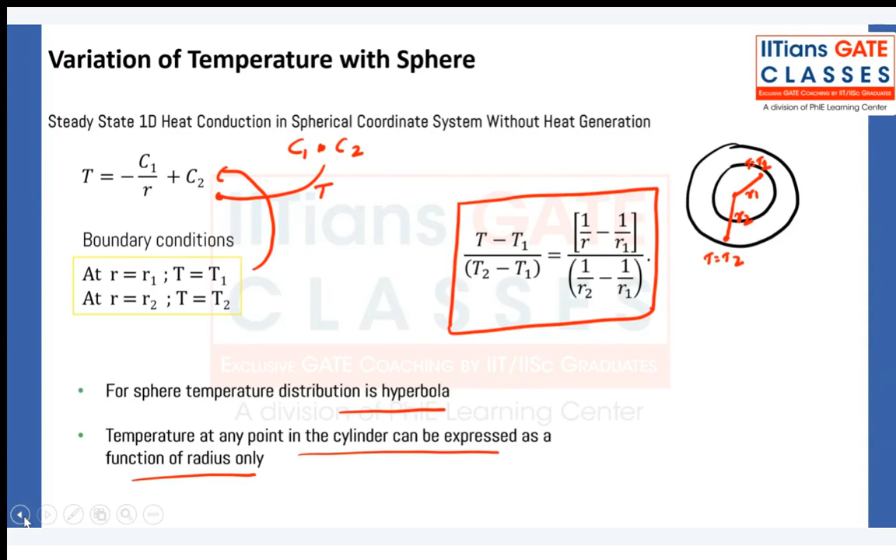Now you have to integrate this. So when you integrate this, you will get r square dt by dr is equals to minus q dot generation by k, r cube by 3, plus c1. Now if I simplify this, I'll get minus q dot generation by 3k, then again r will come here because it will be divided by r square, plus c1 by r square. Now again integrate.

So you will get T is equals to minus q dot generation by 6k r square, minus C1 by R, because again you are going to integrate this, plus C2. So this is your temperature distribution equation for spherical coordinate with heat generation. So this is your equation.

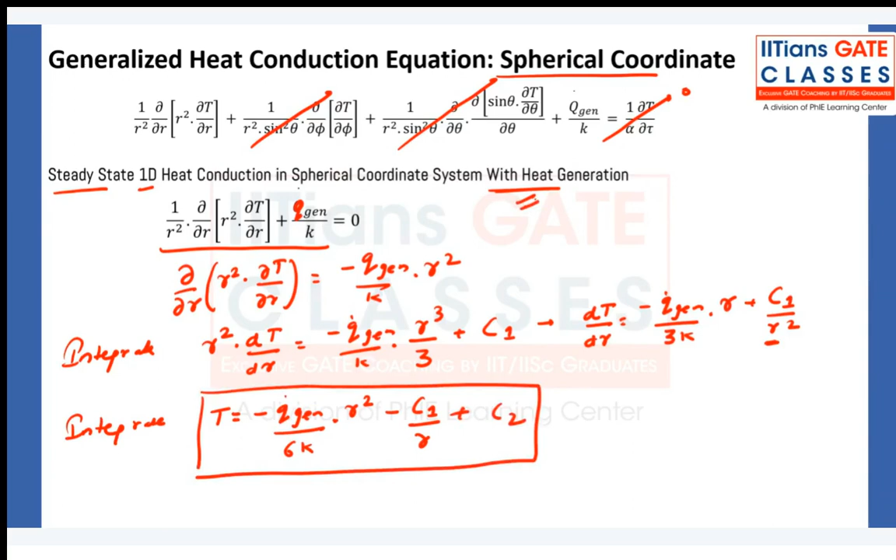You apply the boundary conditions: at r is equals to 0, dt by dr is equals to 0, and again you can do the same thing what we did in cylinder. You actually start with this equation, put this here, and then whatever q is generated, it will be conducted or convected. So you can apply that formula and find out the temperature distribution equation. Whatever you will get, it will again come.

What was the earlier equation for heat generation? Logarithmic, exponential, hyperbola... with heat generation shown... Parabolic, very nice, parabolic. So this will also come as parabolic, okay.

Now, without wasting any time, let us revise what we have done today so that you will get some clarity, okay. So we will start with Cartesian coordinate.

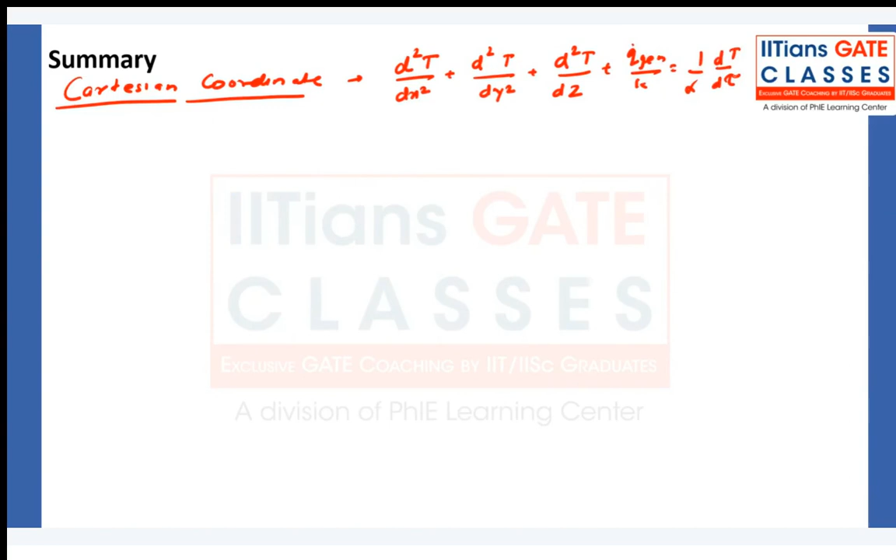Cartesian coordinate. So first of all, we defined a general equation. I know for Cartesian, so I am going to write it. Then I don't know for the rest, I am not going to write this. Okay, this is your general equation. Now what did I do? Steady state, one dimensional, without heat generation, so the equation came as d square t by dx square is equals to 0.

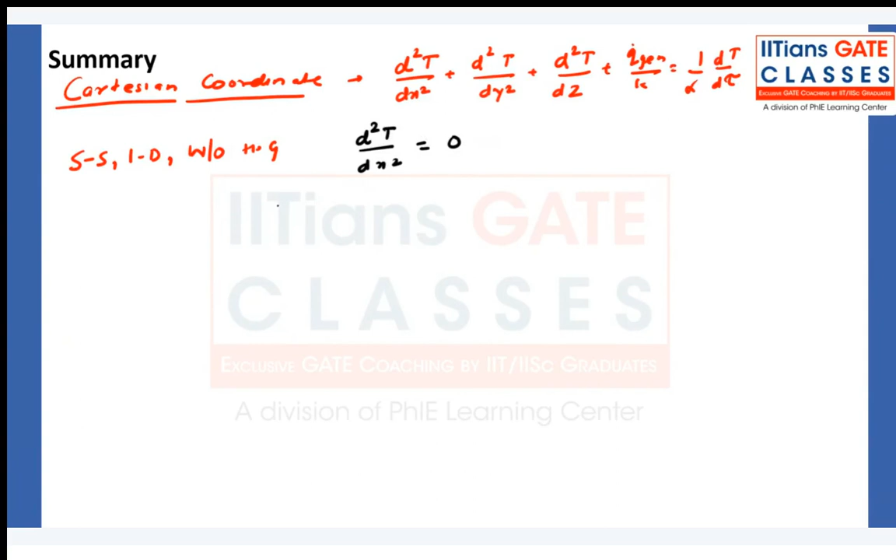And then I applied boundary conditions as x is equals to 0, t is equals to t1, x is equals to L, t is equals to t2. And from here you get t as a function of x, c1x plus c2. That is a linear equation. So it is linear. You need to understand under this case temperature is varying linearly.

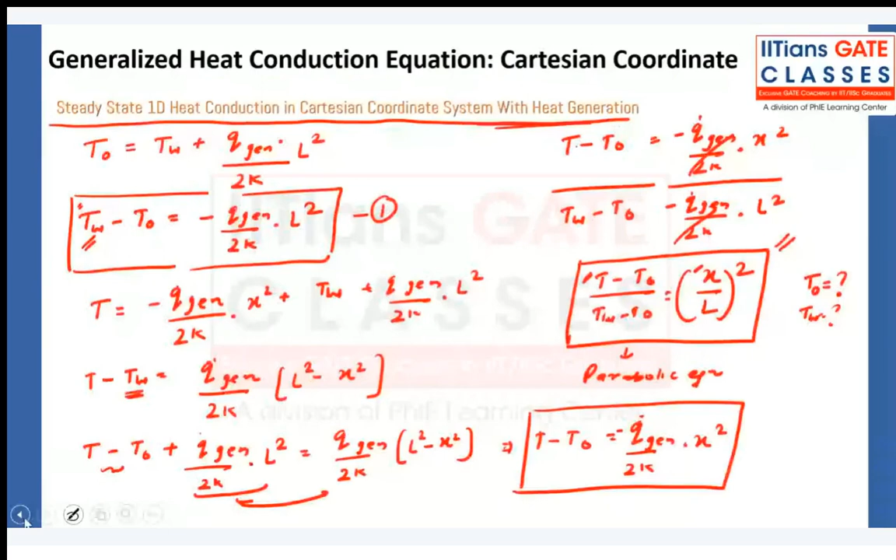You can also remember that equation, t is equals to t2 minus t1 by L, x plus C2 was how much, T1 or T2? I think it was T1. I don't remember it correctly, but I think it is T1. Yeah, it is T1. Yes, sorry.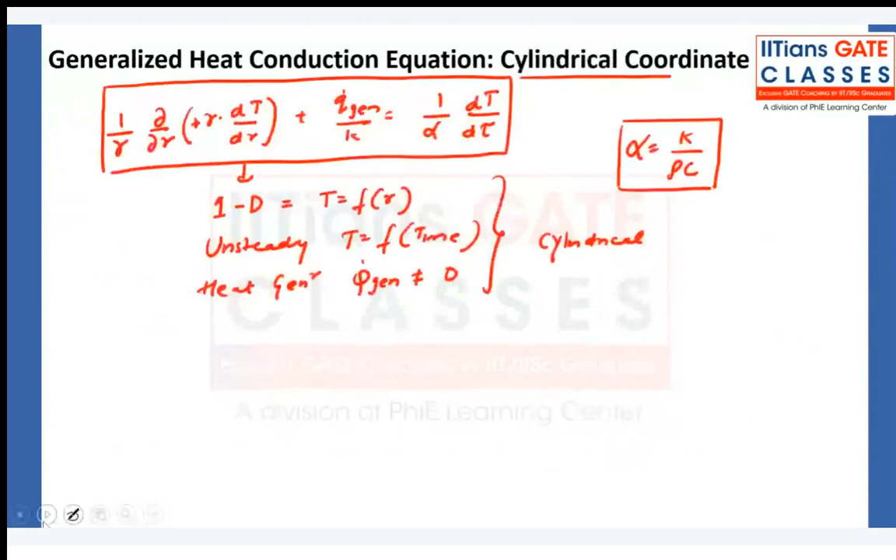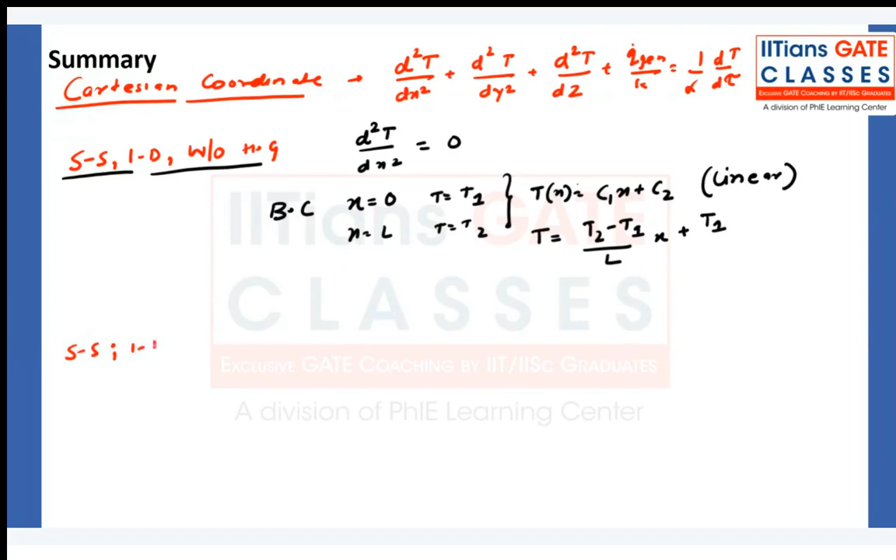Okay, so this is your linear equation. It's very important that you remember how the temperature is varying. Now, second case, what was the second case? Steady state, one dimensional, with heat generation. Okay, so what was the equation?

Equation was d square t by dx square plus q dot generation by k is equals to 0. Okay, this is the equation. What did I do? Boundary conditions: X is equals to plus minus L, T is equals to TW. It is thermal symmetry. There could be a case of thermal non-symmetry as well, so you have to do the derivation yourself if it is different than this.

Now, what is the temperature distribution equation? Temperature is changing as minus q dot generation by 2k x square. Let me know if it is wrong, I am just guessing. So what is the final equation that you got? Temperature distribution T minus T naught upon TW minus T naught, x by L whole square, and this is parabolic. This is about Cartesian coordinate.

Next, cylindrical coordinate. What did we do in cylindrical coordinate? Okay, I don't actually remember the whole equation, so I am not going to write it anyway. I just remember the R part, so that I am going to write.

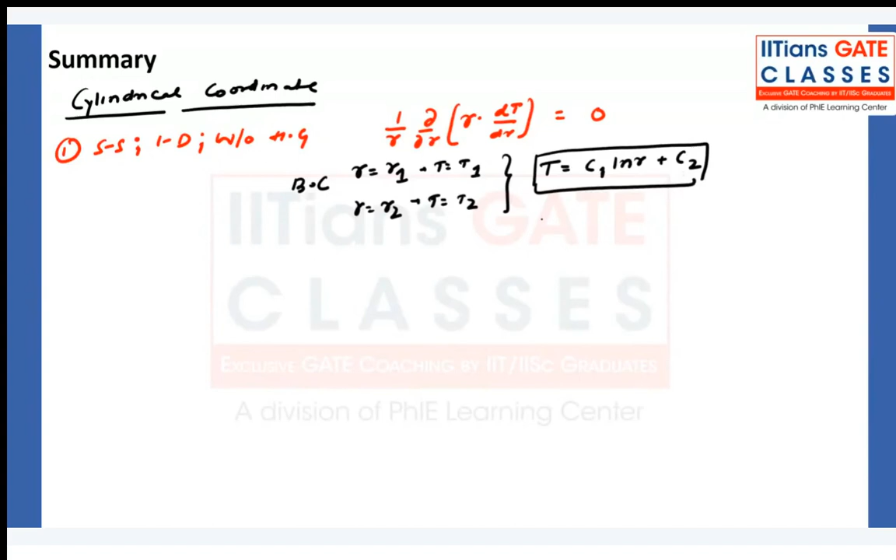And when we calculated the temperature distribution, T minus T1 upon T2 minus T1 is equals to ln R by R1 upon ln R2 by R1, and this is telling me that it is logarithmic. So in this case the temperature distribution is logarithmic. Okay, next, second case, steady state, one dimensional, with heat generation.

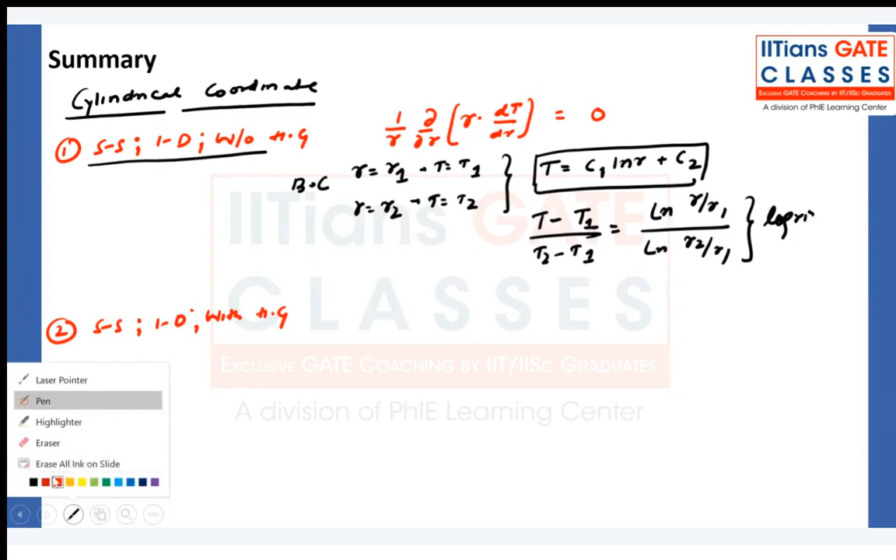Okay, so what is there? 1 upon R, del upon del R, R dt by dr is equals to minus q dot generation by k. This is my equation. Now I have applied boundary condition.

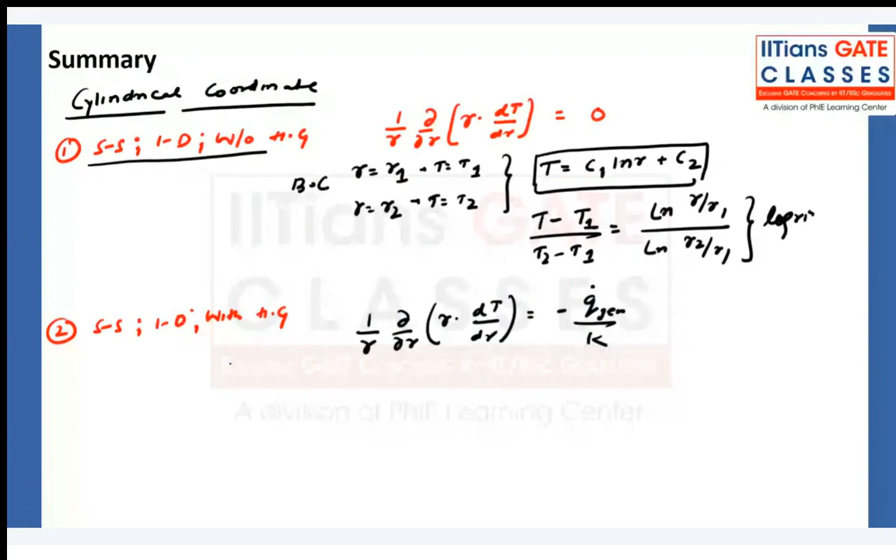What is boundary condition? Thermal symmetry. R is equals to capital R, T is equals to TW. And the temperature distribution equation I will get here is minus q dot generation upon 4k, R square plus C1 ln R plus C2. This was my temperature distribution equation, and I have derived T minus T naught, TW minus T naught is equals to r by R whole square.

And again, that is parabolic. This is cylindrical coordinate.

Next is spherical coordinate. Finally, last is spherical coordinate. Okay, chalo. First case, again I don't remember the whole equation. It is steady state, one dimensional, and without heat generation. Okay, now, so what is the equation?

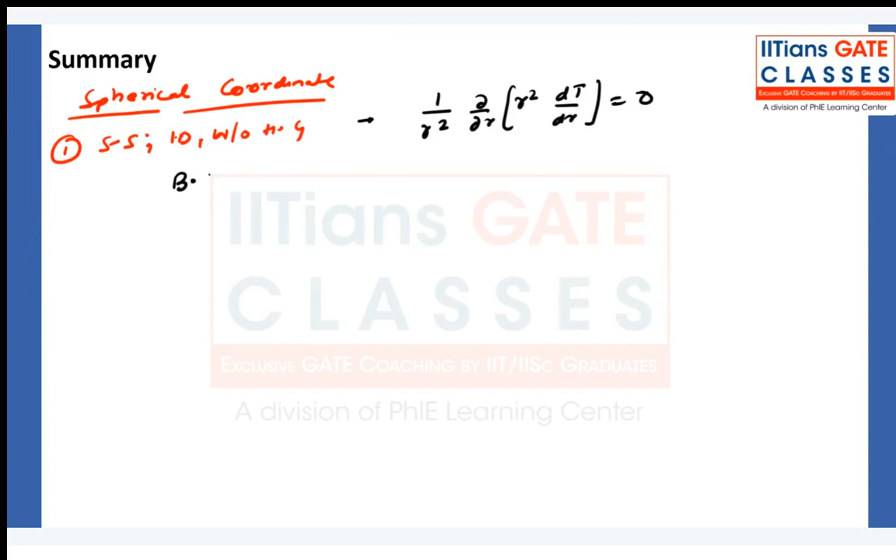1 upon R square del by del R, R square dt by dr is equals to 0. This is my general equation in this case. Temperature, I applied boundary condition. What are the boundary conditions I applied? Same what we applied for cylinder. T is equals to T1, R is equals to R2, T is equals to T2. When I applied this, I got temperature is equals to minus C1 by R plus C2.

And finally, the temperature distribution is this one. And this is hyperbola. Hyperbola.

Yes, very nice. And finally, the last case is steady state, one dimensional with heat generation. So what was the equation? Simple, you will add heat generation here. 1 upon r square del upon del r.

At least this much you have to remember these many equations. You can't skip these equations. This much you have to do. If you are not trying to remember more than this, it's fine. You don't need to remember the whole equation, no need, there is no need of that. Okay, chalo, this is your equation.

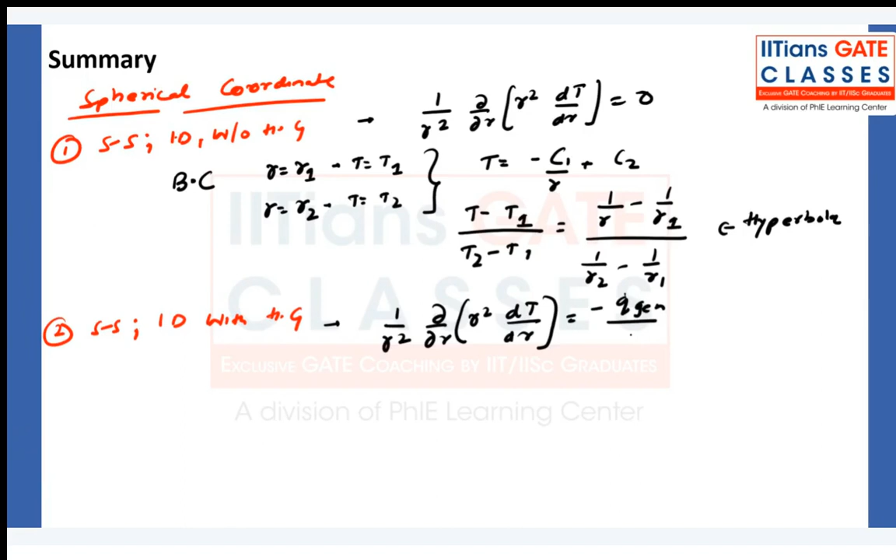Again, you have applied boundary condition at r is equals to capital R, T is equals to TW. And the temperature distribution you will get here is minus Q dot generation upon K, 6K R square minus C1 by R plus C2. Okay, and then again you will get certain equation T minus TW minus T naught is equals to something you will get here.

I don't remember it now, and it is not needed. They have never asked this, never. Even today, in the last 30 years, maybe there is a 1%, 0.01% chance that I may have missed it. Otherwise, as much as my knowledge goes to last 30, 35 years, they have never asked any question from this. So this is again parabolic.

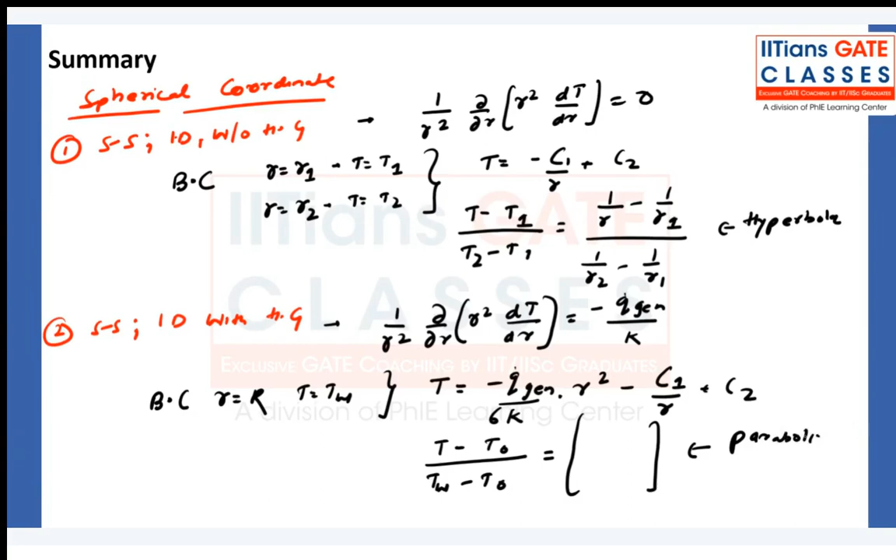So you need to remember one thing. I will still summarize it lastly. What is the last summation? That if steady state, one dimensional, without heat generation case, if this is the case, then...

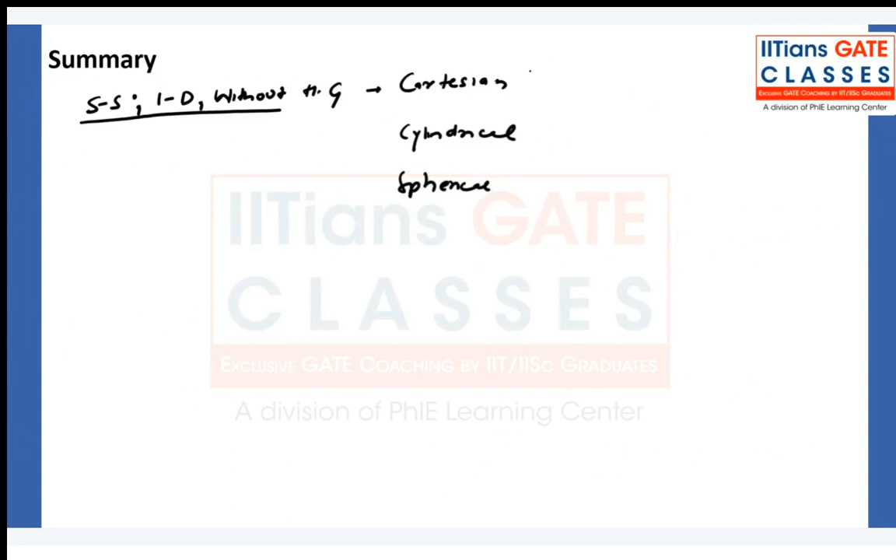Cartesian coordinate, cylindrical coordinate, and spherical coordinate. Okay, this is what? This is this. Okay, this one. Okay, so this is linear.

What is cylindrical? What is cylindrical? Tell me very quickly. No? Why? Come on, logarithmic. And this is hyperbola.

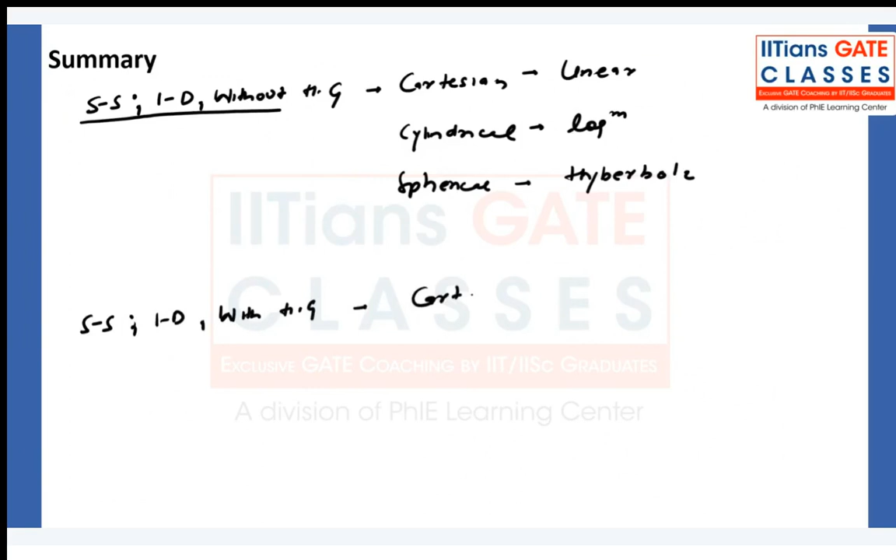Okay, and steady state, one dimensional with heat generation, if this is the case, then Cartesian ho, cylindrical ho, ya spherical ho, everything is parabola. This is your 1 mark question. Anything will come from here, 1 mark gate question, anything could come from here, or in PSU it's very important.

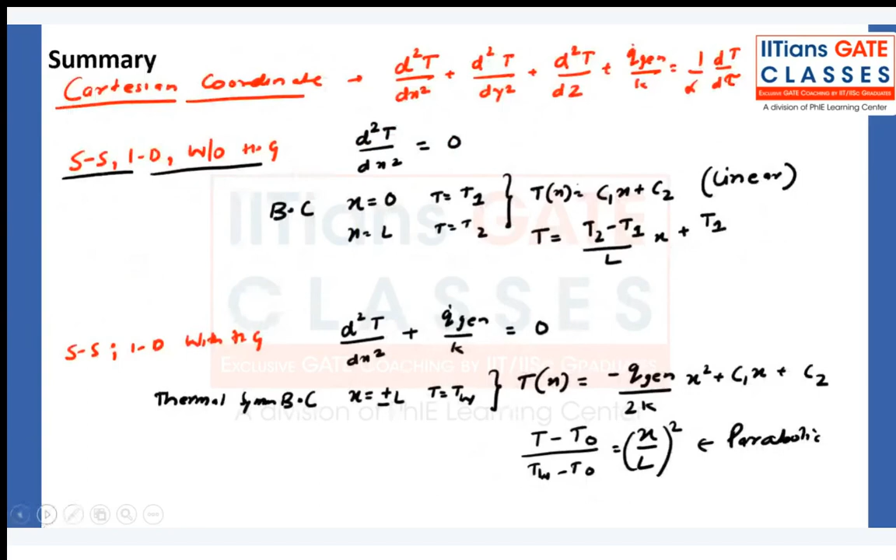Okay, so this is how I have summarized today's lecture. Now whatever I have done here in these 3 slides, I could have done the whole lecture. I did not need to do any derivations because in gate, derivations are not important. So with a little bit more detail, I could have finished the lecture much earlier today.

But why did I not do it? For example, if they have twisted the question and you need to do the derivation, that derivation will not be this long, but it will be a certain portion, a little bit of portion out of this. But you need to know the steps. First of all, you need to know the general equation, then apply the assumptions.

Okay, let me summarize this again one more time. I do not have space, let me summarize it here. What are the steps that you are going to follow? First, generalized equation, then apply the assumptions, whatever assumptions they have asked. Then determine the temperature distribution equation.

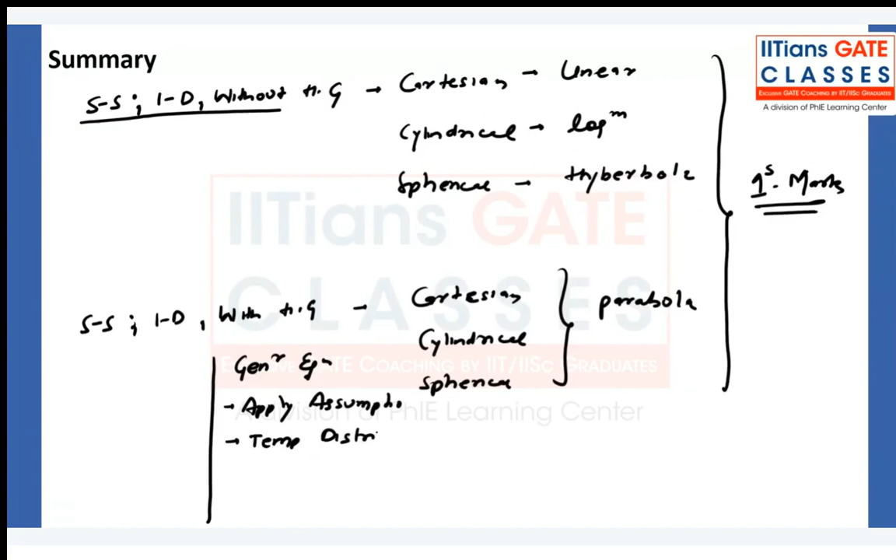Then apply boundary conditions to find C1 and C2. Put this back here and calculate dT by dx or dr, whatever it is, and set it equal to zero to find the location of maximum temperature, Tmax. That is the general steps.

Whatever comes in the question, although very rarely, tomorrow we are going to solve questions so you see what level of questions are asked. Do not get demotivated because of all the derivations. Tomorrow we will do numericals on all of these topics, so you will get an idea of what type of questions are asked and how much detail you need for derivations and solutions. But you need to know the concept, because knowing the concept is important. Then you filter based on what type of questions are asked in the exam, but you cannot skip the concept as it is. You need to understand the concept.

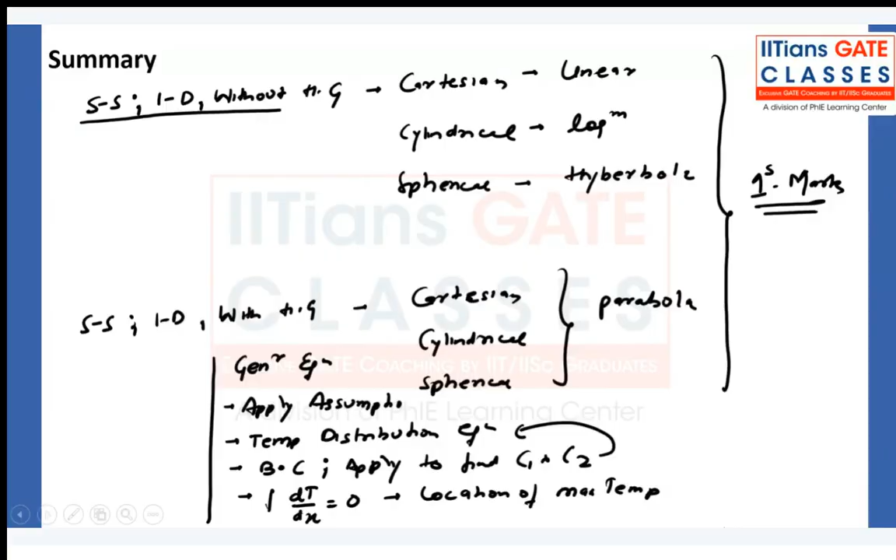But I promise you, this is the only session in which we have done only derivation. We are not going to repeat this. I don't think there are any other derivations like this. Convection, yes, there are derivations, but we are not going to do that, because convection is very rarely asked. Whatever is asked, you can do it without those derivations. Derivations are important for ESE, and I think you are not targeting ESE anyway. So we are going to cover convection as it should be covered, not extra things, because convection is not important from the GATE point of view. Very small, one line questions come from convection, so we will cover it like that. Conduction is very important, that's why we have done the derivation. I cannot skip the derivation in conduction.

I hope you liked today's lecture. How was it, Sean? Okay, Sean says good. Sahil and Shruti, how was the lecture? Did you like it? Okay, thank you so much.

So I would recommend that you revise. It was interesting, okay, thank you so much. That was not expected, okay, so I hoped it was interesting. But I tried my best to do all the derivations, so that at least you get to like derivations. Then it is an exception for you. Okay, alright then.